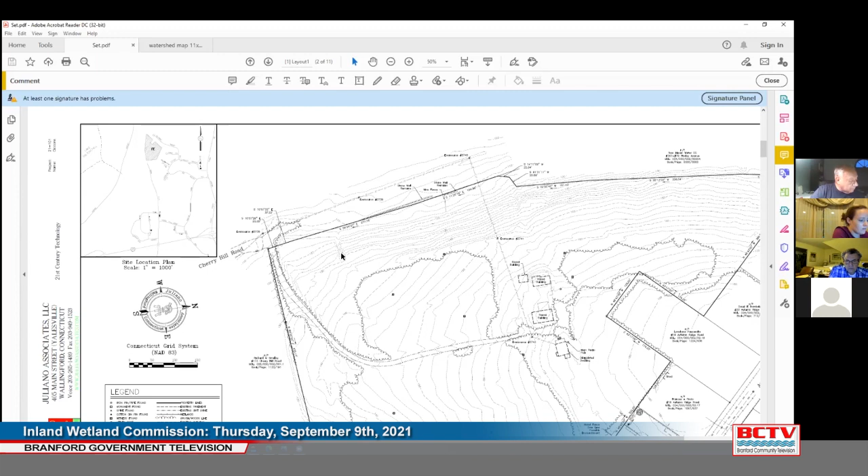Now, what we are proposing is... James, can I interrupt real quick? Jamie Frederick, the Wetland Agent. I just also wanted to identify, I took another look at the soils report today, and the soil scientist did indicate that there's an off-site wetland to the west of the property as well. Yes. So I just want to make the commissioners aware of that. If you want, we can pull up the wetlands report and show you the area he was indicating. Otherwise, I'll let the applicant continue with his presentation.

Commissioner Bassman, just a question as a follow-up to that. How far from the property is that wetland identified? Jamie Frederick, the Wetland Agent. The report didn't identify a distance, but they did point out an area on an aerial image and indicated that it is predominantly dominated by Phragmites. So it's somewhat visible where the area could be. Do you want me to pull it up? Do you have an estimate of the distance?

That area would be approximately, I don't know, probably about 80 feet off the property line in this direction, approximately right where my cursor is. Thank you. Yes, sir. Okay. So that covers essentially the existing conditions of the site.

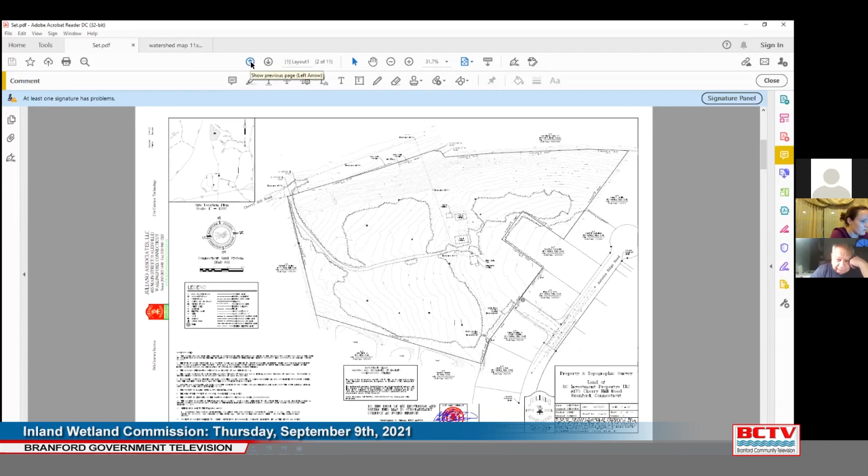Moving on to the actual proposal, what's being proposed is an 11-lot subdivision. And this is essentially the lot layout. As you can see here, this line is based upon the 3 man-made ponds to the east. This is the 100-foot upland review area. There will be proposed properties in that area. However, we are not currently proposing any activity in this area.

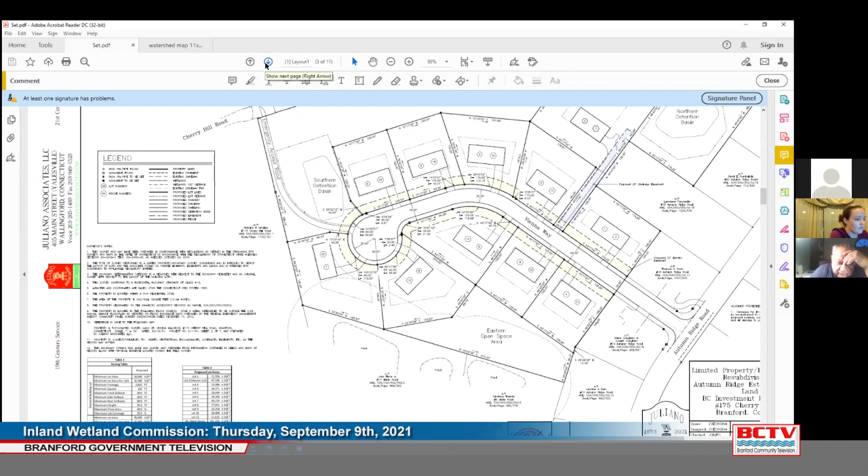I will note, we are showing a house very close to that. That is just for feasibility. At this point, it's oversized, but just showing that the lot can handle a house this big. I believe it's 40 by 80. So there will be no activities, including grading.

So these are the upper lots coming in off Autumn Ridge, because that's how we will access the property. This is the 100-foot upland review area again. In this area, the lots stop even before then, so there won't be any disturbance there. And as we go further down towards the end of the cul-de-sac, here again is the 100-foot upland review area, which does get very close to our proposed Lot 7 house.

But again, this house is not going to be necessarily developed at this size. And I believe the intention is when this lot is developed, we will be back in front of you for that specific lot. This is Commissioner Batson. Can you highlight that particular Lot 7 with the cursor? Yes. So it's right here. I could try to, oh, here we go.

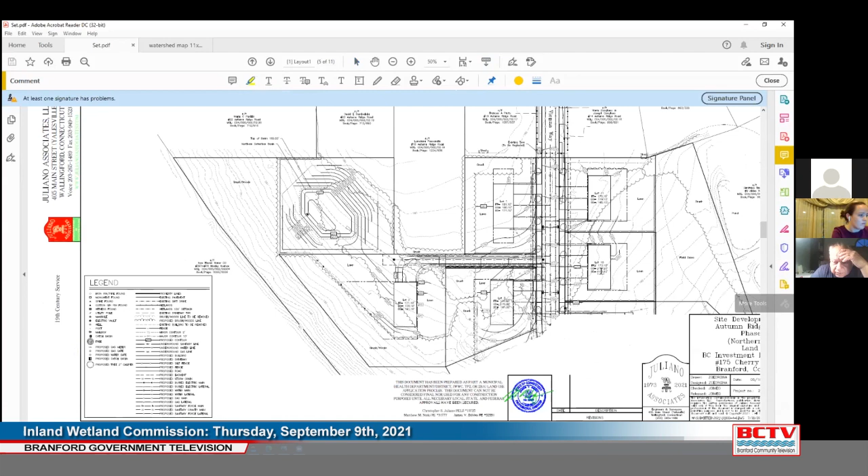Will this let me do it? No, that didn't let me do it. Yeah, it's in this right-hand corner. Here, I'll try to zoom in a little bit more for you. Oh. Mm-hmm. So lot 7 is right here. So this is the lot that I know is the closest.

Now, what we... Commissioner Kraus, can I ask a question about that lot 7? Absolutely. It looks like you have a depiction where the house could be in 2 different places, unless I'm reading the map wrong. But that's where it would be. And I heard you make a statement that said the house wouldn't be that large. How are you sure that the house isn't going to be that large? If this is what's on the map, I would think that this is what we have to consider.

This would be the maximum. So what I'm currently showing pictorially is the maximum footprint for any house on these lots. Okay. So anything that gets constructed is going to be smaller. So it's just feasibility. So just for curiosity's sake, what do you expect the average square footage of these houses to be? That hasn't been fully determined yet. Okay. At least it hasn't been relayed to me.

I know the intention is to essentially match what is existing on Autumn Ridge. Okay. They want to blend this subdivision in with that one. Make it look like one neighborhood. Correct. That's the intention. Okay. Thank you. Yep. And the house, there is only one on this lot, and I'm trying to move my cursor around it for you. This is the actual house. Mm-hmm. Yep. I see it.

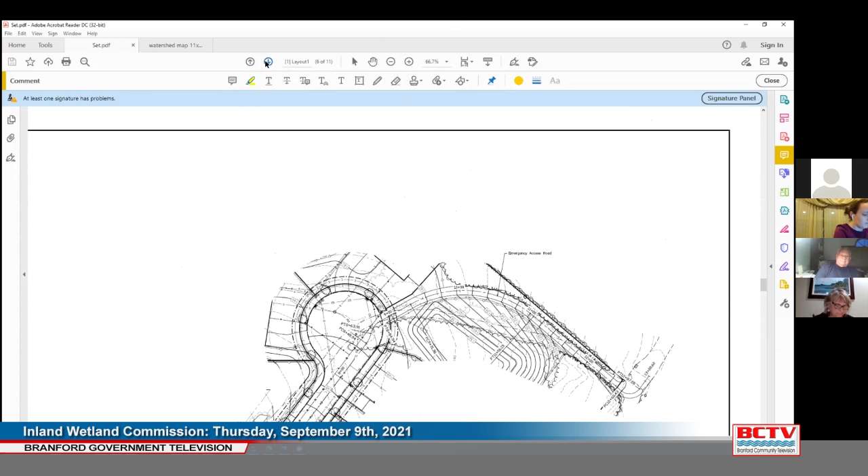Thanks. Yep. So in order to handle any increase of stormwater due to our development, we are proposing 2 detention basins. So I'm going to go to the northern one first. Okay. So as we come in off Autumn Ridge, there will be a detention basin in this corner. This is essentially the northern corner of the property. This detention basin, I do have a little cross section for you. Essentially, we'll have a 3-to-1 max slope for any of the sides of the detention basin, so it won't be any steeper than that. It will be a grass-lined detention basin.

How it is currently designed is there will be an outlet control structure with a 12-inch pipe coming out of it, and that will open up to a flared end and essentially handle up to the 100-year storm without going over a weir that we have built into the structure. So we also have a weir built into this detention basin that the water will not get to unless we, for some reason, got a 500-year storm or something above and beyond normal design standards. So that way the berm doesn't fail and cause damage. So it's designed to be able to handle additional flows without causing any issues or damage to the detention basin itself.

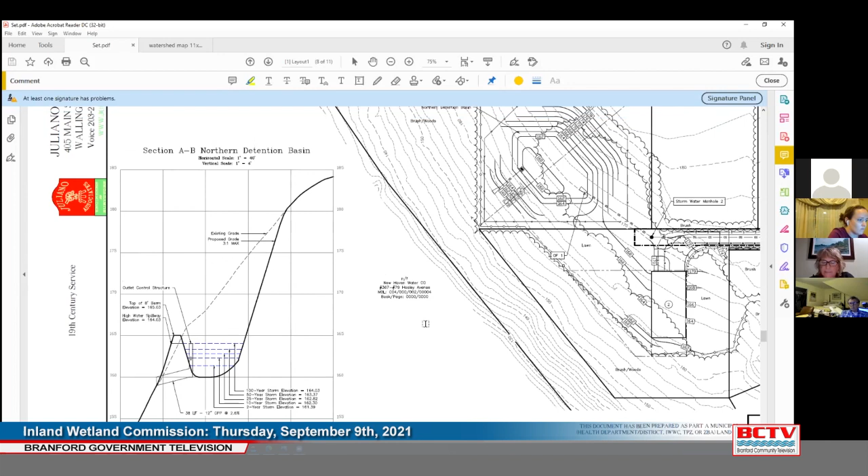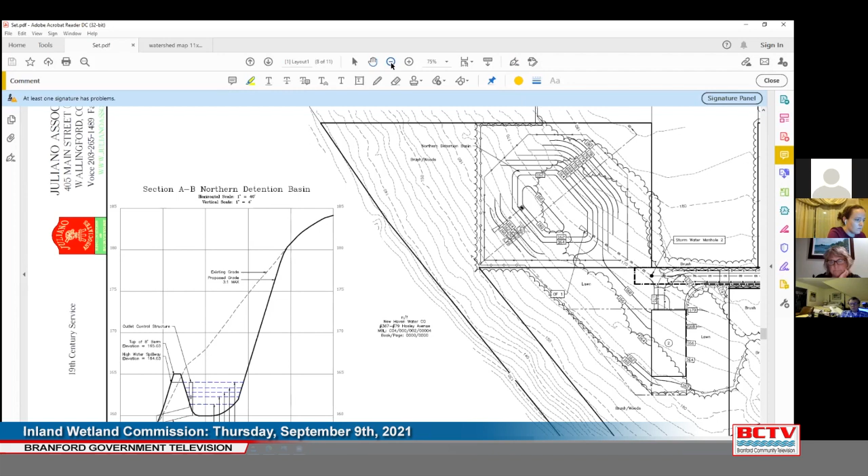And just one more question. I'm sorry. Who will make sure that pipe doesn't get clogged? We've seen a lot of pipes around town that are put in and then they break down and they get clogged. And we've had other developments where we've had some issues with that happening where it did spill over the top. So how is that going to be handled? So as of right now, we're still in talks with who's going to be responsible for the open space. So what this project has is a lot of open space on it. So I'll make it easier. And this particular drainage system is on that open space?

Correct. So we have the 11 lots, and then we have a western open space area, which will include these 2 detention basins, and we're going to have an eastern open space area. But right now we're talking about the detention basin on the western open space area, correct? Correct. And both of them are technically within that area. Okay. And the RWA does own the property. So there's either talks of the open space being deeded to the RWA or the town. That has not been finalized yet.

But that detention basin is handling what will become a town-owned road. So it will be the town's responsibility to maintain it, is pretty much, I guess, what you're saying? Depending on how everything continues to shake out. Okay. Yeah. Perfect. Commissioner Basserman, when do you expect those discussions with RWA to conclude? I expect a lot of that to be worked out through the planning and zoning process. By the end of the planning and zoning process, all that is going to be determined.

Yeah, I don't want to get the cart before the horse here, but it would seem to me that becomes an important element in our deliberations. In terms of, so my thinking is, or my understanding is that detention basin is going to be handling the stormwater from the town road, or what will eventually become the town road. So I believe that ultimately is whose responsibility it will become.

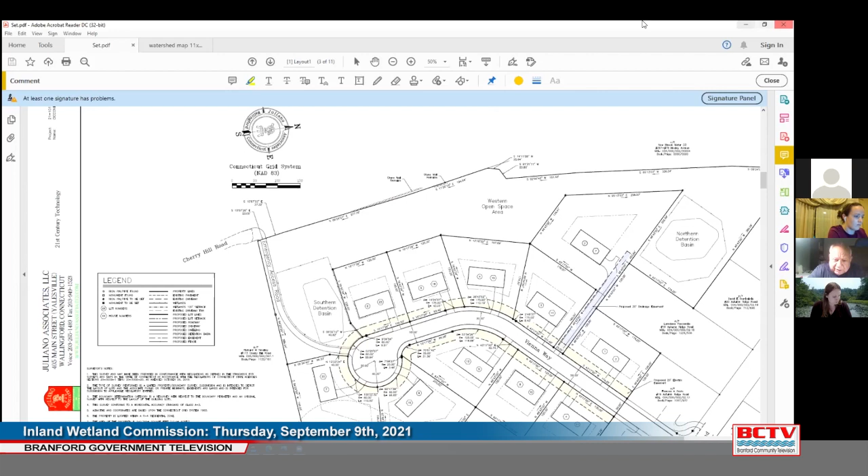Yeah, this is Commissioner Basserman. We've got a few open questions here. I don't want to stop the presentation, et cetera, but obviously there's concern amongst some of the commissioners regarding this overall water treatment on the roads and this detention basin. Anything you can do to accelerate those deliberations coming to a close would be appreciated. Yep, understood.

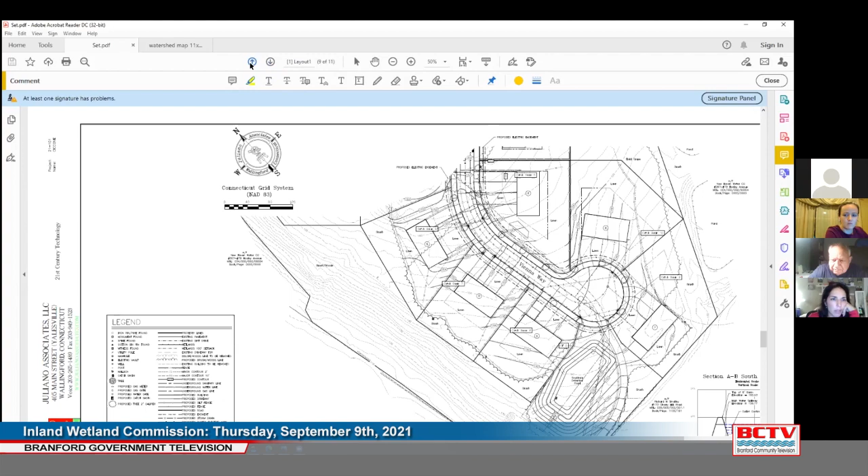This is Commissioner Boda. I actually, before you move on, wanted to understand a little bit more about the outlet structure that is on, I can't even see which map I'm on because I've zoomed in quite large, but where you have the outlet structure that would hold your 100-year, 50-year storm. Mhm. And it's a side view. It's the section AB Northern Detention Basin. So I'm looking at that and I'm wondering, so the outlet structure is at that top blue line. And you're saying that the water is not going to go into that structure until it hits an elevation of 164.03.

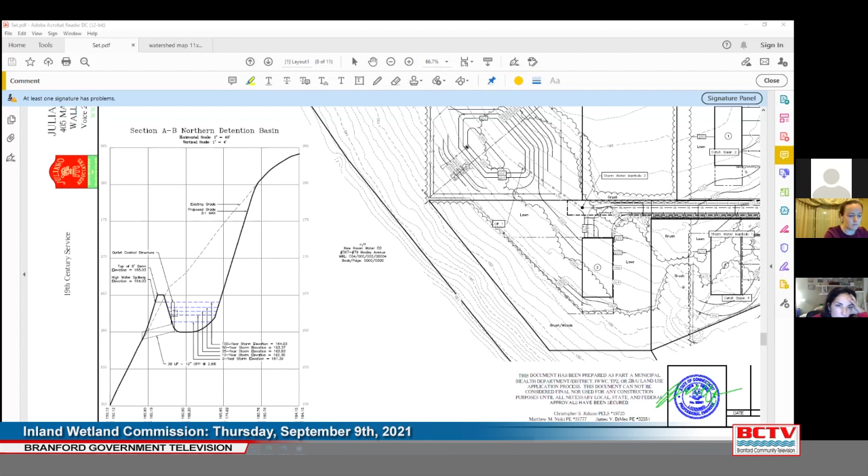So what in this structure here, so this is the northern one. Yeah, can you zoom way in so that everybody can see the details on that structure? Yep. So unfortunately, I apologize, I did not call this out. What there will be is a 6-inch diameter hole at elevation 162. So during the 2-year storm, all that water will remain inside this detention basin. At the 10-year storm, the water elevation gets just above 162, which is where there will be a 6-inch diameter opening on the side of this outlet control structure. So that's when water is going to start coming out.

And then that's going to be the restricting factor as more and more water builds up and we get more and more intense storms, up until we hit the 100-year storm, which is where the water essentially gets to the top of that outlet control structure. And then above, you've got how much room? So like the 200 or 500 year, it will overtop? So anything more than the 100 year overtops over the berm? It'll never overtop the berm.

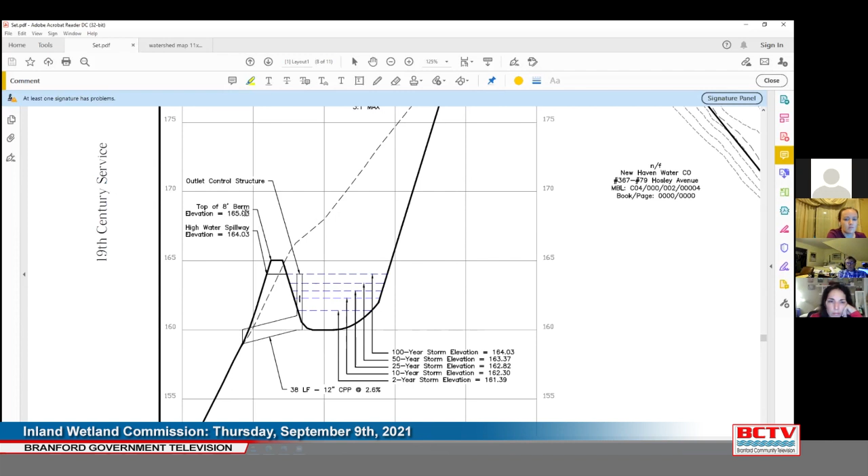So what we have is the top of the berm is at 165.03, and we have an emergency spillway at 164.03. So at the 100-year storm, it literally gets to that emergency spillway elevation. Is that kind of hashed line? Where is the spillway denoted? So it's right here on this profile. Can you do it again? I was looking at my own map. Sorry, I can't highlight it. So it's here. Okay, that's right.

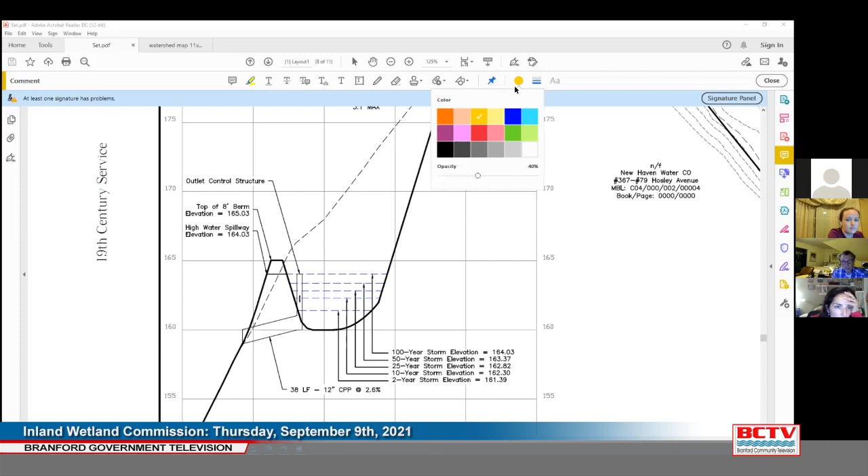I see it, high water spillway. Will that work? No, it didn't work. Okay. Yeah. There we go. Yeah, right there. So now I can't delete that. Sorry. That's okay. All right. Yeah. So it's right there.

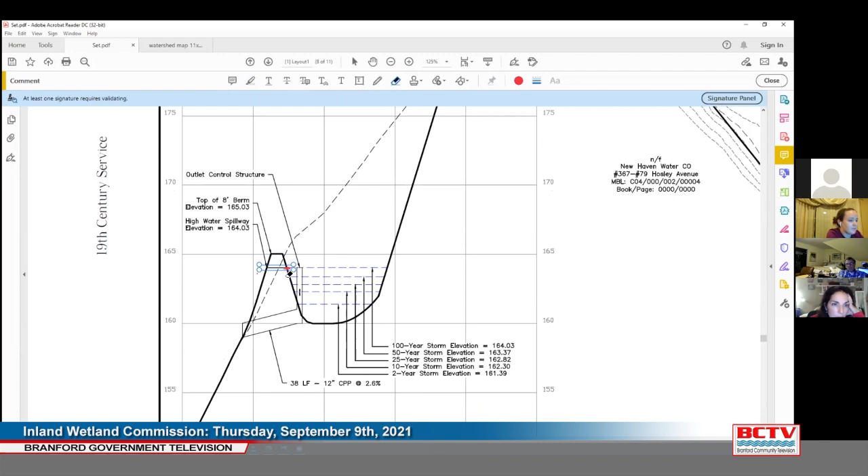Is the intention? It is where that spillway is depicted, at least on the profile. And that spillway will be a stone-lined spillway to help again prevent erosion if the water were to ever get to that point. So that's the northern detention basin.

Let me just ask another question before you move on. So then below the 10-year storm, that water will be detained and not infiltrate, or will the bottom of the basin allow for infiltration of the 1 and 2 year storm? It will infiltrate, yes. And we're being conservative with our infiltration rates. Essentially just saying it'll dry out.

So wait, there were 2 different things. So when you say that you've been conservative with the infiltration rates, does that mean that you're estimating, or have you actually done a perc test for the bottom of that basin? So no perc test has been done. I'm using soil data and also reports from the soil scientists and things like that.

And then basically I'm using an infiltration rate of, I believe it's 1 inch in 60, which again, as long as there's soil there, it'll go. And that's true for the other detention basin as well, that you're going off of? Yes. Correct. So soil maps and reports as well as the soil scientists.

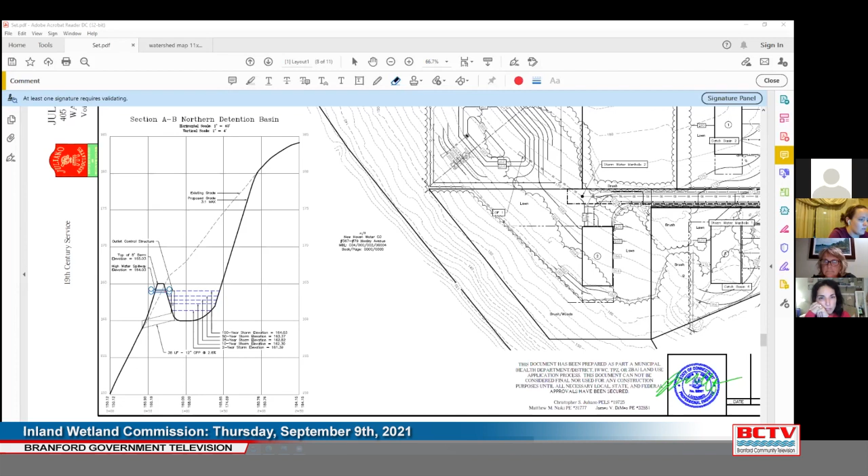This is Commissioner Begamon. So anything that goes out is going to drain onto stone, or only the spillway? So the spillway is there and designed for emergency purposes. Right. If we get like 3 hurricanes in a row and get unheard-of flooding, that's the only time that'll ever be utilized. So otherwise the water, if it goes up to the 10-year, what is it discharging onto?

At that point, there's a 6-inch diameter hole in the outlet control structure, which then leads to a 12-inch pipe. Right. And that 12-inch pipe has a flared end and will discharge out. It basically just daylights. Onto what is growing there, grass or rock or whatever. Correct. Just to give you an idea, the 100-year storm out of that pipe is only 1.26 CFS.

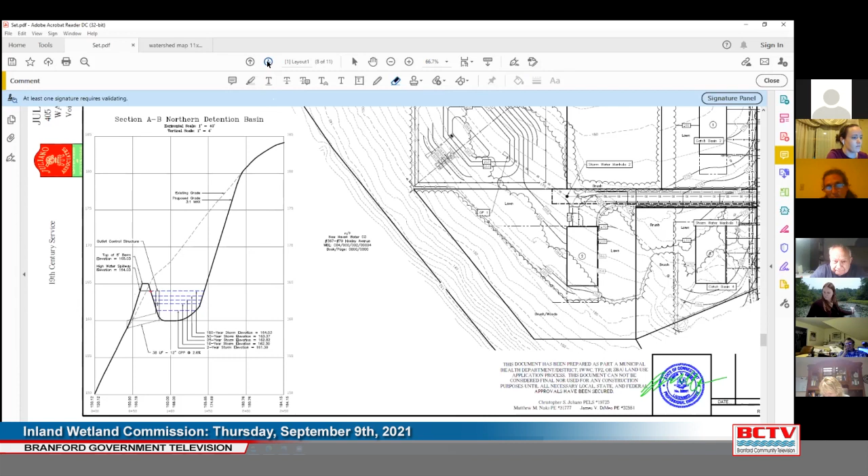Okay. Any more questions on the northern one before I move on? Okay. So the southern detention basin is at the end of the cul-de-sac. Essentially, this one's set up the exact same way. Again, a very conservative infiltration rate. We have the outlet control structure. Again, an emergency spillway, which will not get utilized unless something catastrophic happens. And we have a pipe with a flared end.

The opening in the side of this outlet control structure is actually at the base of the detention basin, which is again a 6-inch diameter opening, which then flows into a 12-inch pipe.

This is Commissioner Kraus. I have a question about the southern detention basin. I'm looking at your map and I'm seeing that you're moving the path that we walked up to the right, if I'm correct. Correct. We walked up the path that would go right at the corner of the southern detention basin. When we were walking, there was quite a bit of erosion on that path. It was really rutted with all the runoff.

So it appears to me that because of the steep grade of the property, once you put in the cul-de-sac and build the houses and all the driveways, and there's more impervious surfaces, this southern detention pond is probably going to get a lot more water than that area gets now. But even now, that pathway that we walked up was very rutted. So the water must have really come streaming down there in the previous storms.

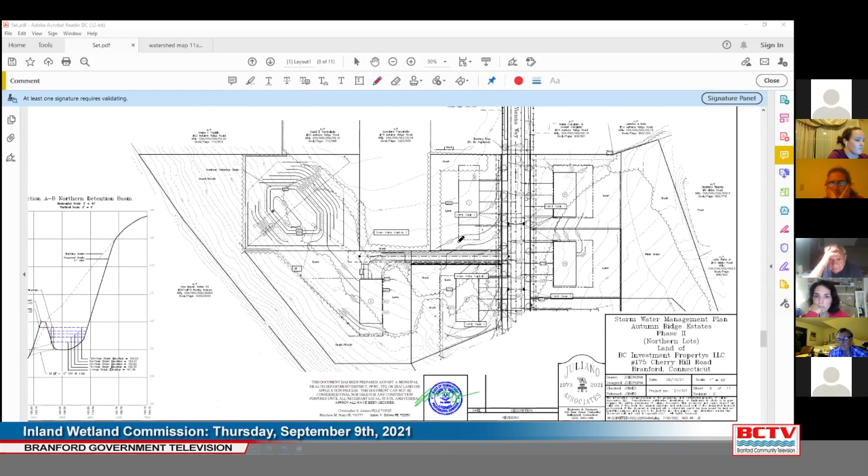I'm sorry, this is Commissioner Boda. I just want to clarify. Before I had asked about infiltration, are you asserting as part of this application that you are retaining the 1st inch and infiltrating it? So the northern basin is. That is not the case on the southern basin. So that's a long-winded answer of saying no. That was not considered for the basins.

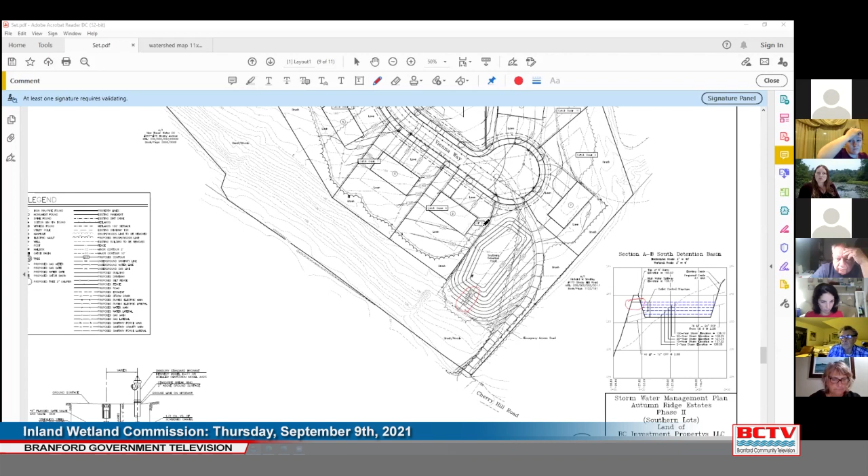Jamie Frederick, the wetland agent, and just to point out, the individual house structures' roof drains do not discharge to the stormwater basins and are not retained on site either. Correct. The roof drains are all basically just discharging to the ground and not going into these detention basins. Part of the reason for that is otherwise I was afraid of starving any existing wetlands that we did have.

Commissioner Batsman, again, given the fact that the regulations that we have in town talk about retaining the 1st inch, why was the decision not to incorporate that into the design in this detention basin in the south? I will be 100% honest with you, sir. I do not have a good answer for that other than I will look into it and make it happen. Yeah, specifically, to infiltrate. Correct. I'm sorry, this is Commissioner Boda. Did you say infiltrate or retain? Sorry, I was trying to read. I believe you said both actually, but yes.

And that's not a difficult fix for us because the only basin that I have to reevaluate is the southern one. That's not going to be a problem. Yeah, this is Commissioner Boda, and I think that if you are going to assert that, then you would demonstrate that with some data. Absolutely. Yep. The drainage report will be updated to reflect it as well. Yes. Thank you.

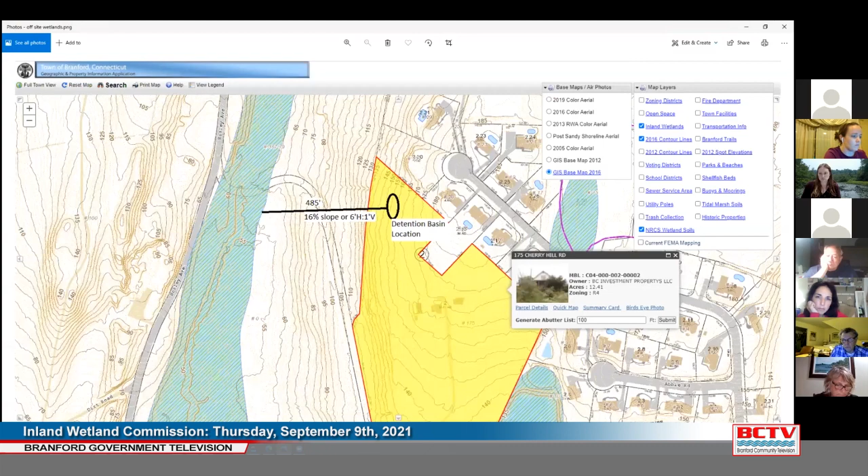The high point of the property is essentially, as you come in off Autumn Ridge, right around here where the first lots are. And then the road hooks down and goes down slope. Secondly, I did also evaluate the watersheds, and a watershed map has been provided to you. Each watershed and everywhere that the water is going, I analyzed. It's essentially broken down into 4 different areas, and not one of them has an increase.

I'm either matching or decreasing the flows to each of these 4 areas around the property that I evaluated, which essentially I evaluated in this corner of the property. I did evaluate over here as well. And then I had the pond area, and I believe this property as well. So those are the four areas that I looked at, because those were where the water was heading to. And I didn't want to completely change where the water's going.

So the drainage report, if you took a close look at it, would indicate that there's no increase in any of these areas, and no significant changes. In volume or in timing? In peak flows is essentially the main thing that I looked at. The only places that will have additional volume would be the waters flowing north.

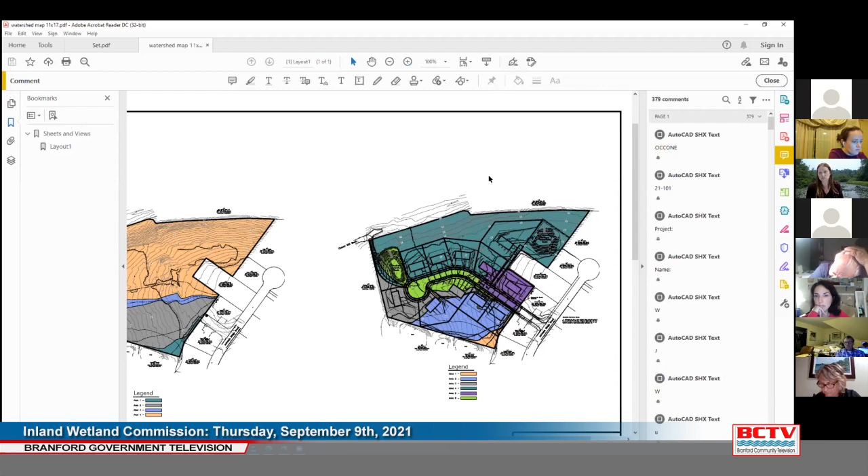Well, this is Commissioner Basswood. It sounds like that report is going to be something we're going to take a close look at. And it's interesting as to how you make the evaluation with treatment of rooftop stormwater versus without. So hopefully we can move on, but that shows that report is going to be critical. Okay, and then I think that was the bulk of what I wanted to talk about, at least in terms of wetland impact. So if there's any other questions or concerns, I will do my absolute best to address them and or make sure I have answers for you for the next meeting.

Commissioner Bergman, just one question about that southern detention. Yes, ma'am. The outlet for the pipe at the bottom, that's going to go towards that already kind of erosion ditch that we looked at on the site walk yesterday? Yes, thank you for bringing that up. I forgot to mention that. So these plans haven't been revised to depict this. I did issue a letter to Jamie.

So basically what we'd end up doing for that erosion ditch is some minor regrading in order to put it to a 2-to-1 slope, and then stabilizing it with standard seed and hay in order to prevent future erosion.

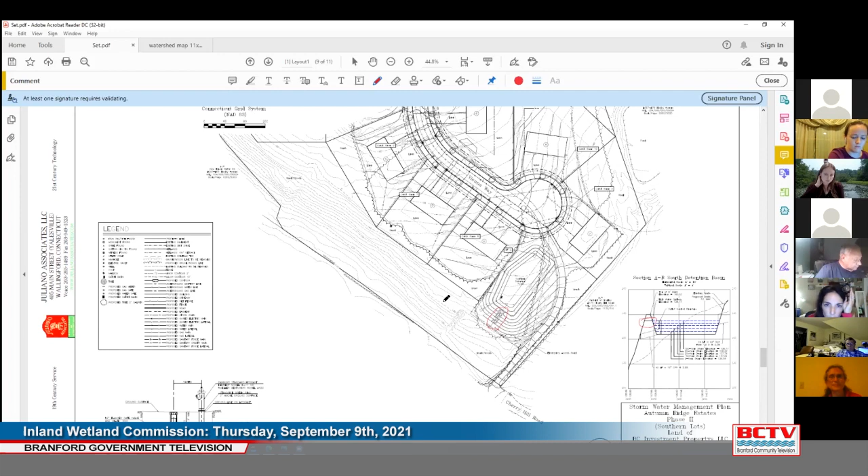This is Commissioner Boda. I was trying to look at the file in the Dropbox. Can you clarify which map has the sediment and erosion control plan? So the sediment and erosion controls are pretty much shown on the stormwater management plan, so sheets 9 and 8. The main thing is going to be the stone silt fence. That essentially is encompassing most of the S&E measures that are going to be required for this.

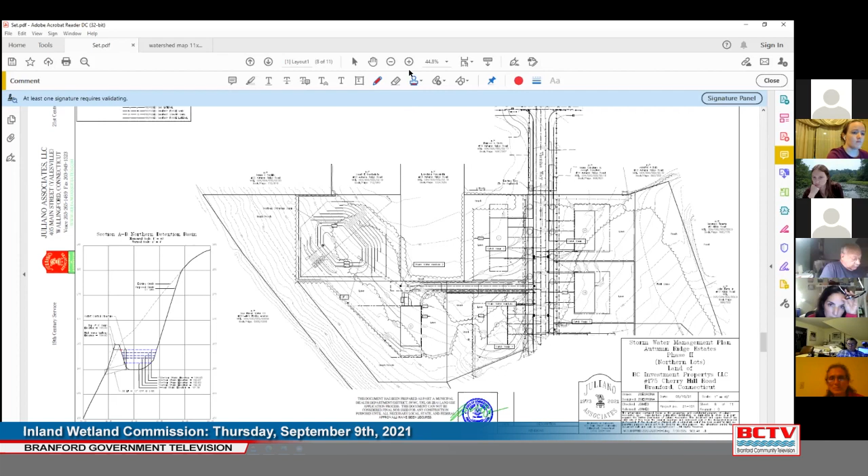This is Commissioner Boda. Do you have stockpiles on the site? And if you would just refer to the map number that you're looking at, because mine is blown up like this, but I can see it. Yep. It does not appear to be on there. It will be. I apologize.

So this is Commissioner Boda. As you're doing your review, go through with a fine tooth comb and make sure that any of the sediment and erosion controls are noted, so that we can look more carefully at them. I'll leave that to you to go back and see if there's anything else that's not called out.

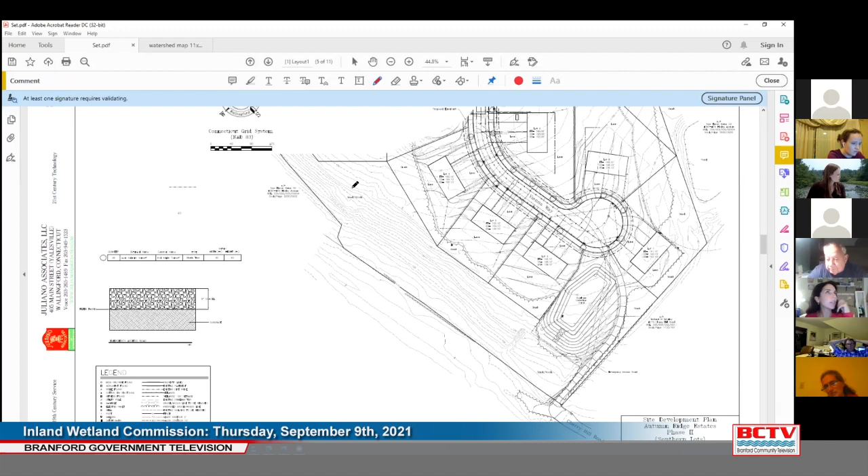And if the intention is for the town to maintain, is there an intention for snow stockpiling? Where would that get pushed to? The end of the cul-de-sac? Yeah. There's really no other location for snow other than the end of the cul-de-sac. That's essentially where it would end up going. So this is Commissioner Kraus, and you probably wouldn't block that emergency road you have. So where would you be putting the snow? By lot 7? That's the closest to the wetlands?

So where we'd be putting the snow? Right. The snow would most likely end up in this area. Sorry, it's crude. But then you'd be blocking that emergency road that you're putting in. It won't block that road. It'll need to be over. Sorry, my hand's a little shaky. So all the snow is going to fit in that little section of a cul-de-sac? I'm going to have to evaluate the snow further. That sounds like the right answer.

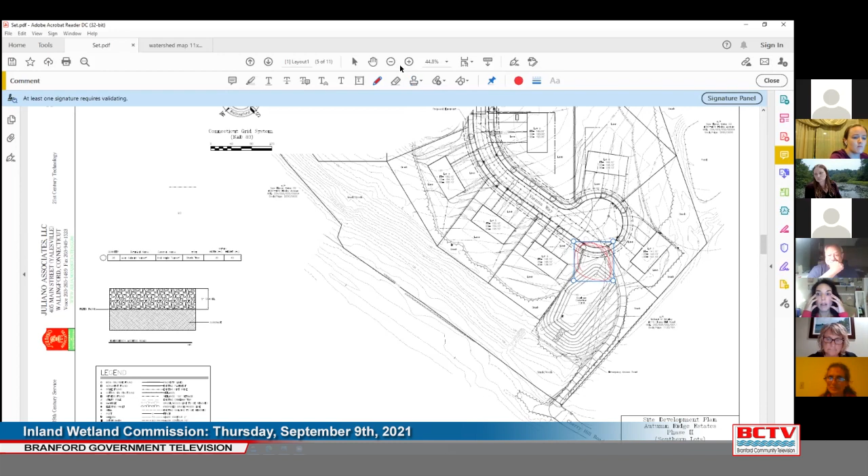That's Commissioner Boda. I would think about, as you're evaluating, both the access road, and if the only place the snow is going to end up is piled on top of a storm drain, that is going to potentially impede the water moving off as it starts to melt. Mm-hmm.

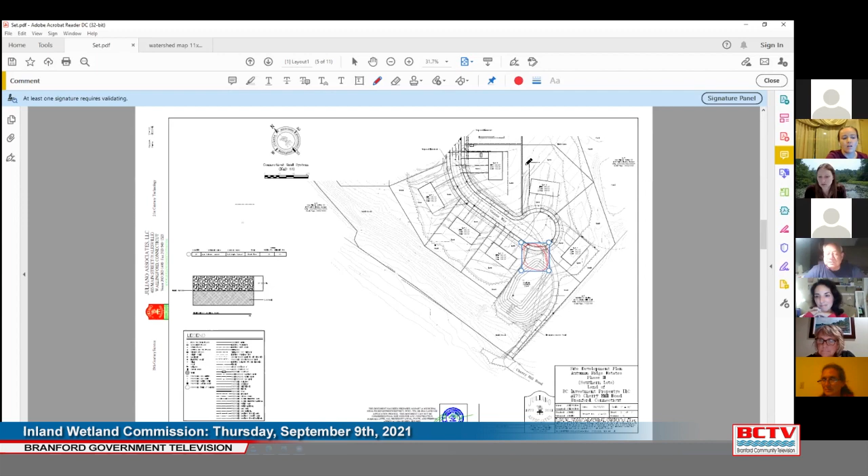Any other questions from the commission at this point? I'm good. You're good? No, I said I don't have any questions. Oh, okay. Thank you, Commissioner Kraus. If there's a member of the public that would like to ask a question of the applicant, please state your name and your question. One minute, Peter. I'm going to stop screen sharing so I can check the participant window and see if anybody's raised their hand. I don't see anyone trying to talk. You might want to let people know how to unmute if they are on their phone. Yeah, if anyone from the public is looking to talk, it is *6 to unmute, or *9 to raise your hand.

Do you have something that popped up? Somebody's asking a question in the chat: has the Autumn Ridge access been approved? Nothing has been approved at this time. Great. Then, Mr. Chairman, I would like to table this application till next month until I can address the comments of the commission. I appreciate your motion to table it. I think the commission would be happy to entertain this at the next meeting.

I do just have one question. Jamie, I would like to confirm, has this been given to the town engineering department, Jamie Frederick, and the wetland agent? It has been. I have not received comment, but they do have a copy for review. And I will let them know that it's continued to the October 14th meeting, so that hopefully they can provide comment in time that you might be able to respond to it.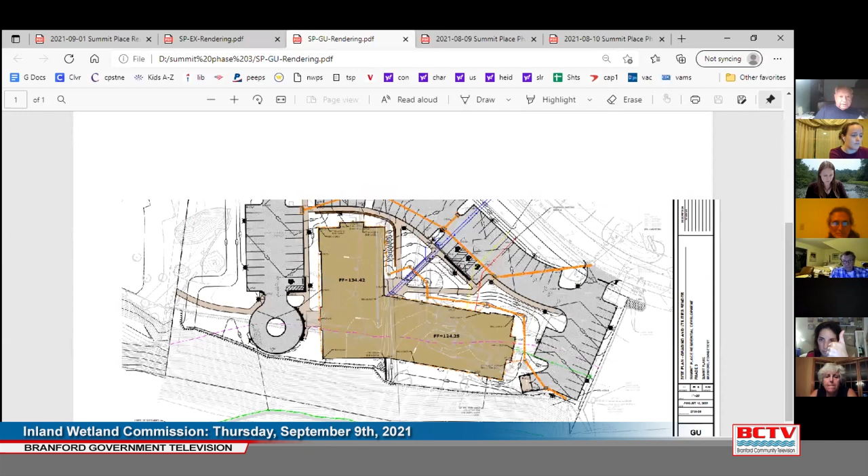Okay, great. So she had a question about whether or not access would be needed to the east side of the building, east being on the downside of this map. And access will not be needed. That area is just going to be landscaped and lawn. Also, at Jamie's suggestion, we included a split rail fence at the limit of disturbance or the top of the slope that's going to remain to help discourage any activities going down the slope. I think the nature of the slope, for those members that saw the field walk, is somewhat discouraging enough, given the grade of it.

And lastly, we were able to locate the ultimate stormwater discharge that comes from a portion of the property currently and discharges into the adjacent wetlands. We generally found it to be in acceptable condition. The pipe's in good shape. Limited erosion at the toe of the outlet.

And again, what was mentioned at the last meeting that we continue to propose is reduction in impervious surfaces from approximately 2.1 acres out of the 3 overall to approximately 1.5 acres. So we are reducing flows both to the wetlands and to Summit Place.

One item that was mentioned in Jamie's report or her comments was Section 7.6A of the regulations, which has requirements regarding storage of the first inch of the water quality volume of runoff. And we are seeking, I don't know if waiver is the right term, but I know that your regulations do allow for the commission to consider other alternatives. We're hoping not to do that for a couple of reasons. The first is that

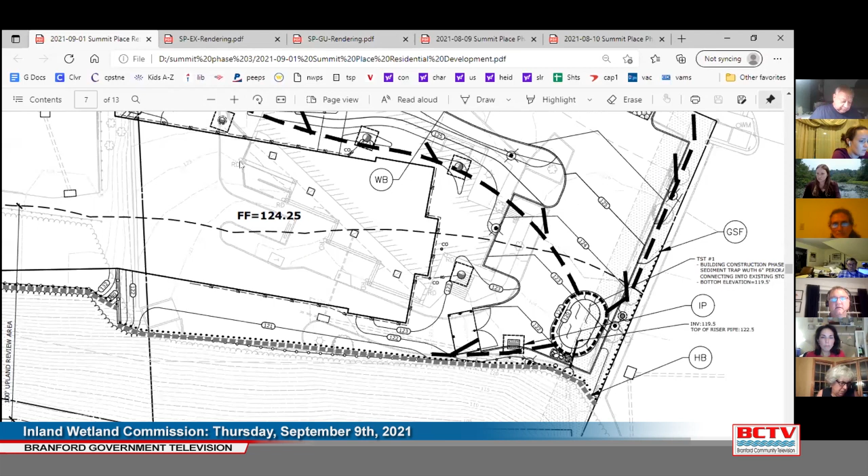Is it depicted on your plan anywhere? Yes, sir. It's on the grading utility sheet. We don't show it on this rendering for clarity, but let me go over to our full set of plans that was submitted. And let me scroll up to the utility plan. So, for example, on the drainage system that connects to Summit Place, this last inlet is a CDS model 2015-4. And similarly, the last inlet structure.

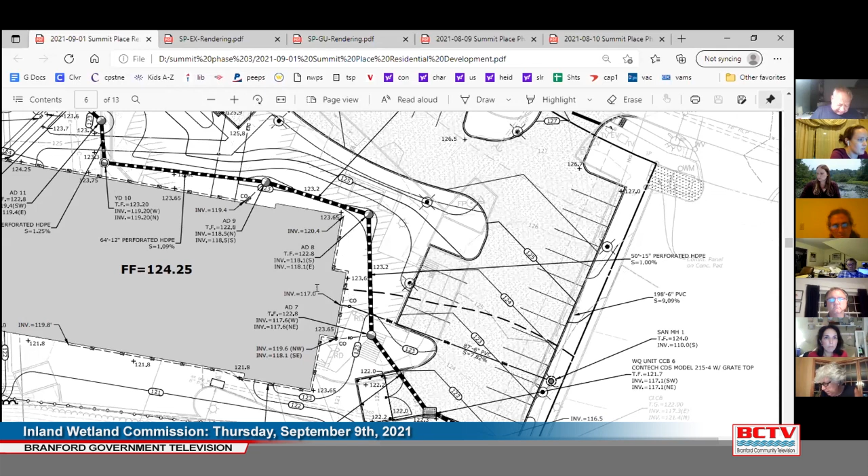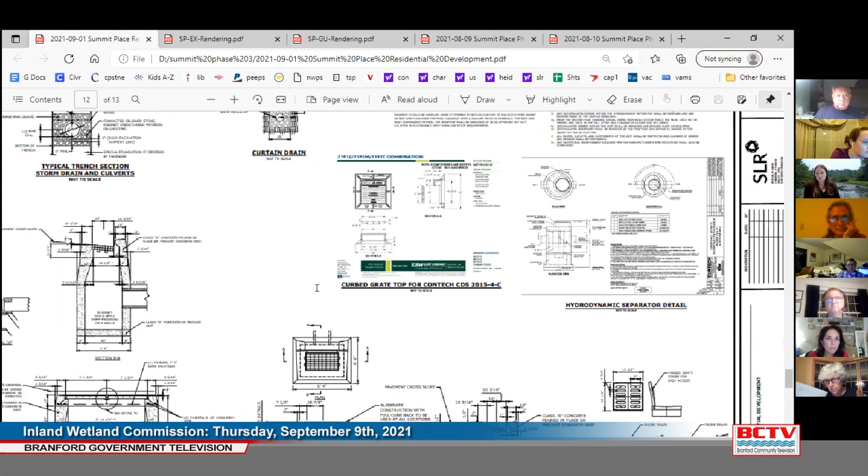Is there a cross section on sheets like 10 or 9 or one of those? I believe we have a detail showing that, and also we have literature in the drainage report from the manufacturer showing how they meet the water quality flow requirements, and also some case studies where they've demonstrated in situ. Okay, I'll keep looking. Thank you. So I'm looking through our details right now. We do have details and cross sections for the hydrodynamic separators. Thank you.

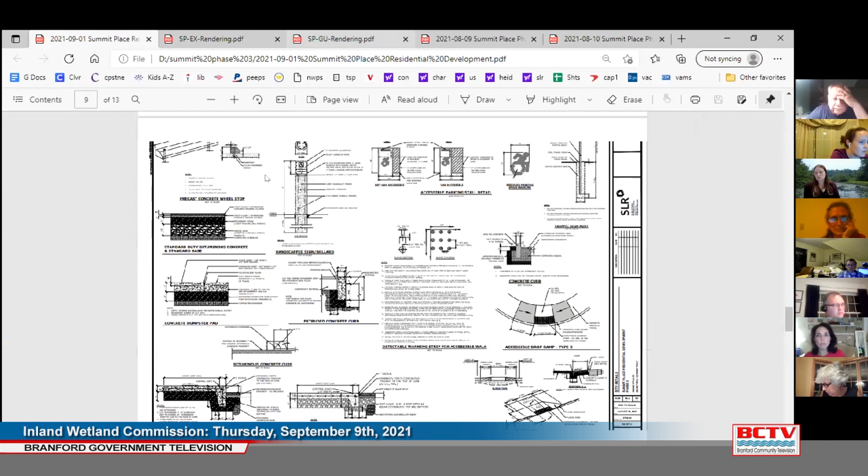So that's a summary of the modifications to the plans that we've made. If there's any questions from the commission, I'd be happy to answer them. I know that most of the members were at the field walk yesterday. So if there's any questions that came out from that field walk, I'd be happy to answer them as well.

Jamie Frederick, the wetland agent. Can you go over the phasing of the erosion controls during development real quick? Sure. So we go back to our sediment erosion control plan. So we provide for 3 temporary sediment traps, one that will connect to each of the current discharge points exiting the site.

The first of which is located in the upper parking area, which during initial construction of the building will have runoff directed from that upper parking area to it, where it will have an under drain that will be wrapped in filter fabric and stone, and an overflow riser that will allow any accumulated runoff in the basin that doesn't get through the perforated under drain to reach the catch basin in Summit Place.

Similarly, a smaller temporary sediment trap located a little bit further to the north with a similar mechanism for dewatering, a perforated under drain wrapped in stone and filter fabric with a high level riser that will be directed to a catch basin on Summit Place. And lastly, another additional temporary sediment trap to the southeast corner of the site, which will ultimately discharge through a filter fabric encased under drain to the manhole that we saw on our field walk just off the

current edge of pavement. So in terms of phasing, this sediment trap will exist during the initial phases of construction and during initial building construction. It will be eliminated essentially when mass earthwork and mass site grading occur to create the parking lot as you see here. And then these two temporary sediment traps will handle the runoff from this upper parking lot.

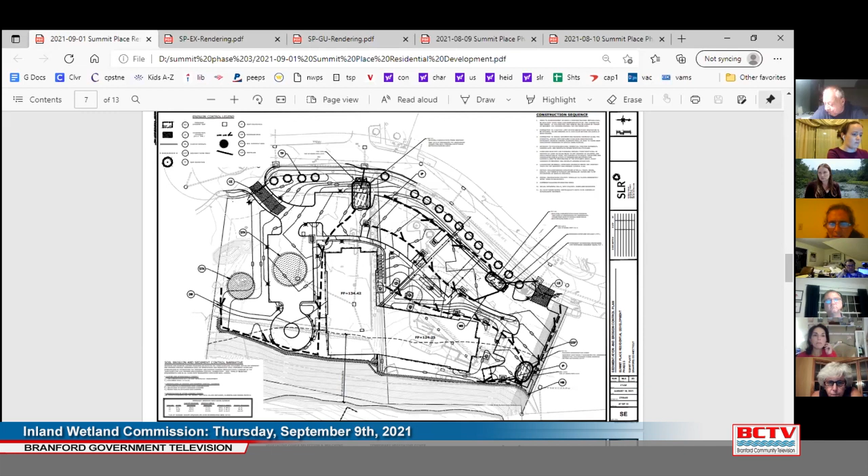Understood. Commissioner Begman, the question, you may have said this, but the roof runoff, how is that being handled? So the roof runoff, let me go back to my colored plan. The roof runoff is all going to be conveyed to the storm drainage that ultimately discharges to that existing manhole off the parking lot today. And that represents the majority of the runoff that will get to the wetland, with the exception of this portion of the parking lot over here.

So while we're reducing the amount of impervious surface and the amount of runoff that gets to the wetland, we're also changing to a large degree the quality and nature of the drainage that gets there, because the majority of it is just going to be building runoff, which will have a relatively clean composition when compared to parking lot runoff. So the building is all being directed ultimately to the wetland through a water quality unit. Thank you.

Any other questions from the commission? I think staff's recommendation is that we get the additional information from the applicant and assess this at our next regularly scheduled meeting. Is there any commissioner that feels that they have enough information to want to act this evening?

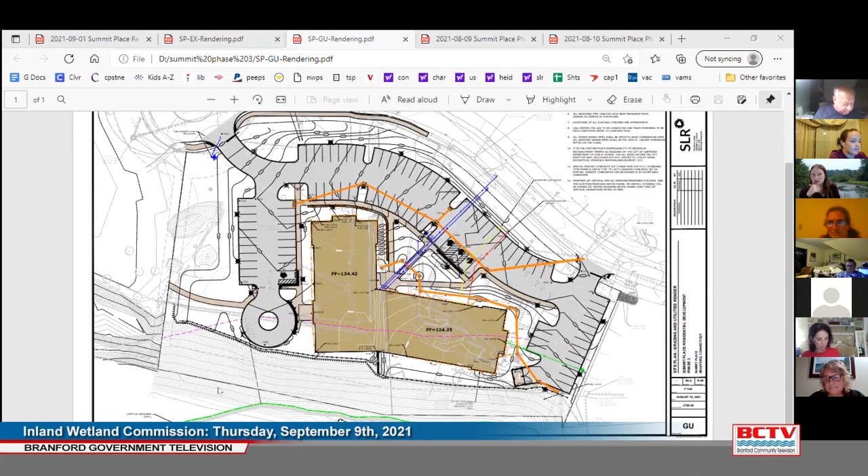All right, next up, Inland Wetland 210804, 47 Gould Lane, scour hole repair. Jamie? Jamie Frederick, Inland Wetland Agent. I think I was supposed to get a revised plan with maintenance details. And it looks like the applicant is not present. Jamie, Michael, did you? Oh, sorry, Michael. I didn't see you. I'm sorry. I'm on my wife's computer. All right. So I guess the applicant is present.

So I had mentioned that the commission might want to see maintenance details for the proposed drainage structure. I've not received that yet, but I can pull up the site plan that we do have. Also, I just wanted to mention that if you look forward to enforcement on the agenda, 47 Gould Lane is under that section as a notification of the erosion control status, and the applicant had requested that both items be discussed at the same time. So I am going to take a minute. Does any commissioner have an objection to dealing with those at the same time? Okay, good. Treat them the same.

Jamie, not to interrupt Michael again. I did forward those comments along earlier in the day, and I just resent it again. If you have the ability to pull it up out of your email, the revised plan with the maintenance comments that you requested are there again. Jamie Frederick, Wetland Agent. I will share the site plan that was just emailed to me. Obviously, I've not had a chance to take a look at it. Screen share. All right.

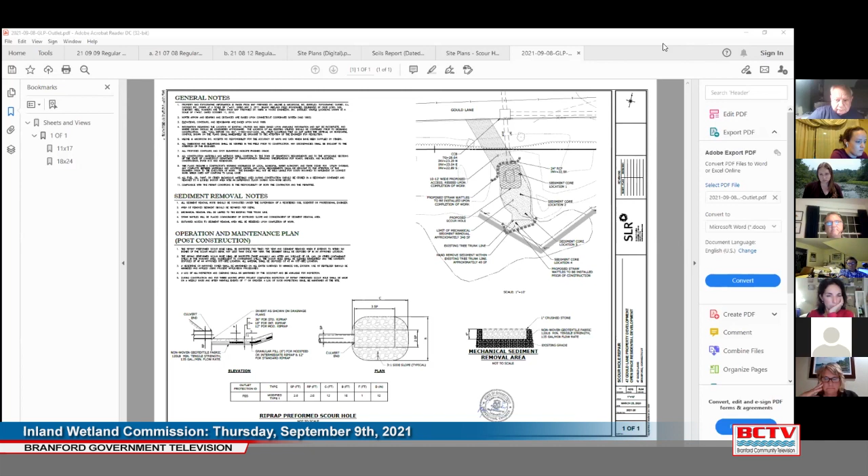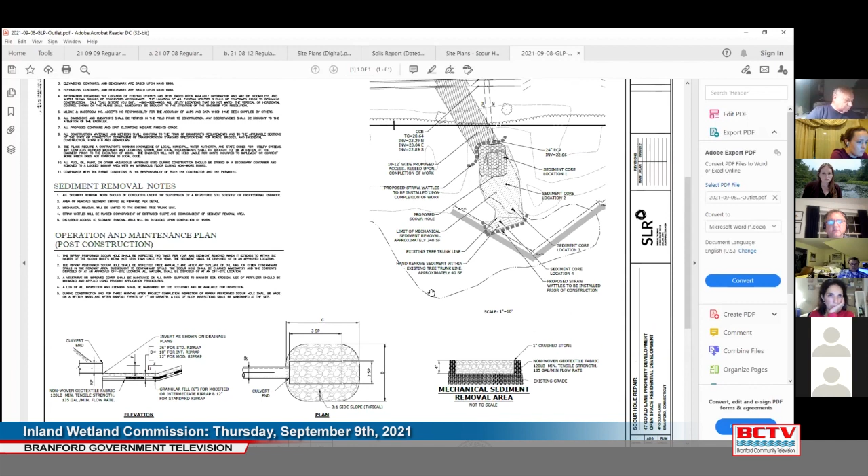So we have a stable surface within the existing channel where the stormwater exits the road. We did review this with the land trust, and they have provided their consent for the improvements. And Mr. DeJoy is also committed to having a soil scientist oversee the removal of the sediment, so it's done in a sensitive manner. And whether it be a soil scientist hired by himself or one hired by the land trust, I don't know that that's been worked out. But either way, it will be overseen by a soil scientist, and the end result should be an improved condition at that outfall where there is no stable energy dissipator today.

In terms of the post-construction operation and maintenance plan, it's really very simple. This is no different, like I said, than sort of a riprap splash pad, more or less. So it does have a small depression in it, so it should be monitored occasionally for accumulated sediment, primarily road sands, things of that nature, and sediment removed when it's greater than 6 inches deep. There will need to be monitoring of it after it's installed to make sure that there's no issues with erosion, further erosion into the wetland areas. So it's really a very straightforward maintenance plan. There's really not a whole lot of complication to it. So if there's any questions, I'd be happy to answer them at this time.

Commissioner Bassman, just for clarity purposes, what we're looking at on our screen right now is the same plan that we received in August, except for the addition of the operation and maintenance plan. Is that correct? That is correct. Okay. Thank you. Any questions from the commission on this proposed repair? This is Commissioner Bassman. Staff, are you okay with moving forward on this? Jamie Frederick, the wetland agent. I would have a couple of questions.

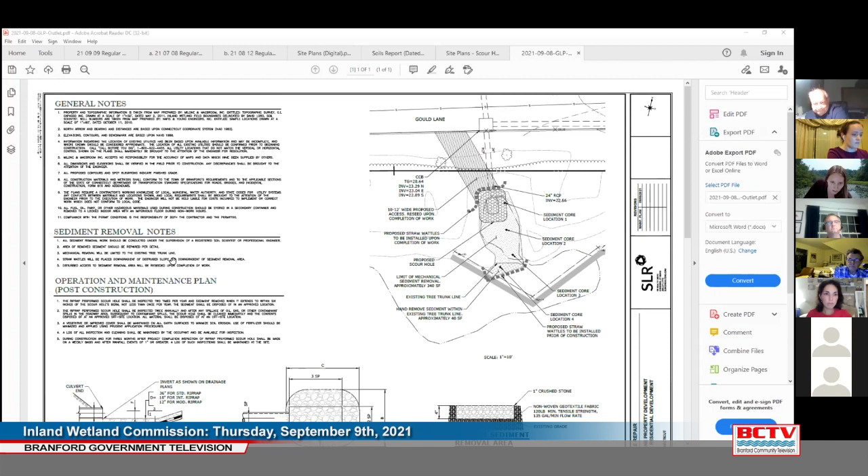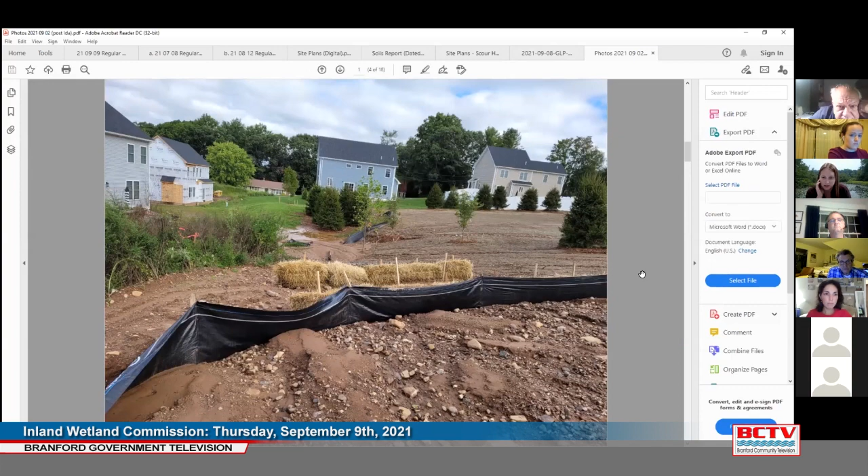The other concern I would have is that there have been some erosion control concerns, particularly with the large rainstorm events that we've had recently. And I will share some pictures of what the site looked like immediately after Ida. Bear with me as I go to the other discussions folder. So this is just a picture of the lower detention basin, upper detention basin, silt fence overtopped, and at the bottom of the picture, you can kind of see there's a yard drain circled with silt fence that was also overtopped. So there was sediment that got into the yard drain, which ultimately discharges to the outlet we were just looking at the maintenance for.

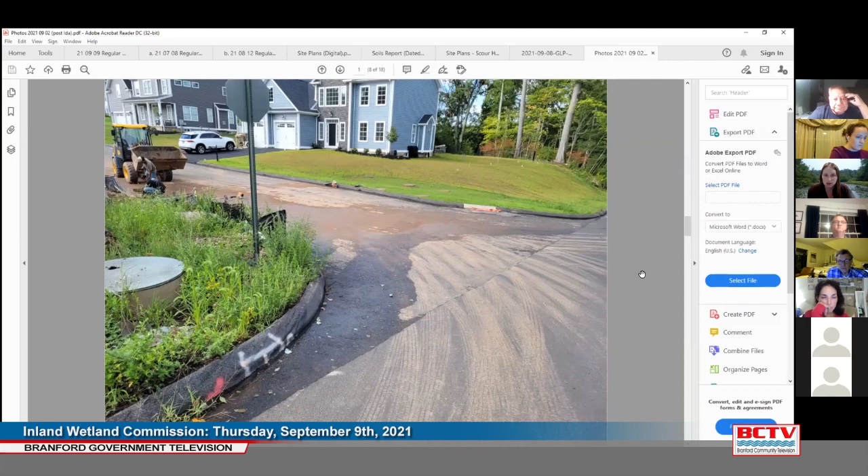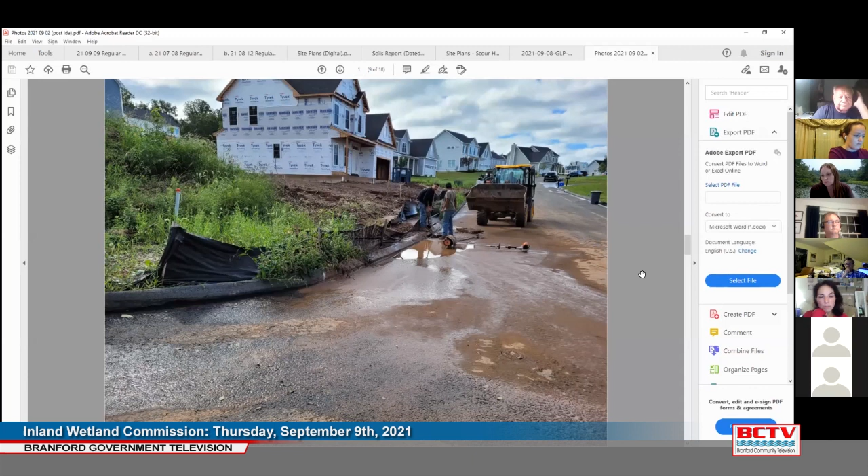And then just kind of general, this is uphill of the erosion controls, but just some general site conditions. And then as you can see, there's a crew working on cleaning out the catch basin here. This was in the morning right after the storm, so they were on the repairs, but the silt fence also overtopped on the corner of Gould Lane and La Mantra, and sediment got into that catch basin as well, which also discharges to the outlet that they're looking to do the activity at. So I just wanted to make the commission aware that there have been some erosion control issues relative to Ida and Henri, and that these issues are relevant to the area that the application is pending for.

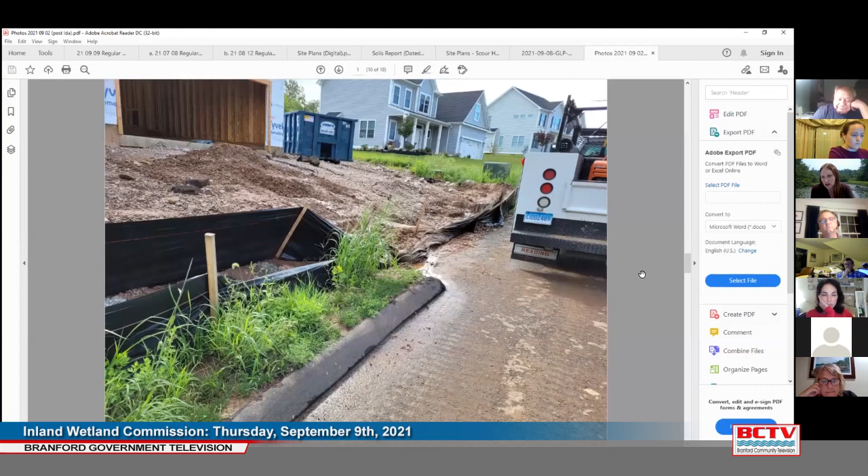And there have been substantial improvements on the site. However, these areas are still open and under construction. So this is the low point in Gould Lane. The catch basin on the left-hand side of this picture, to the left of that is where the outlet is. And that's the general area that the work will be proposed to occur in.

And this is up by the discharge for the lower detention basin, which is very well vegetated, as you can see. So then, this is Commissioner Wasserman. So Jamie, how would you like to proceed here?

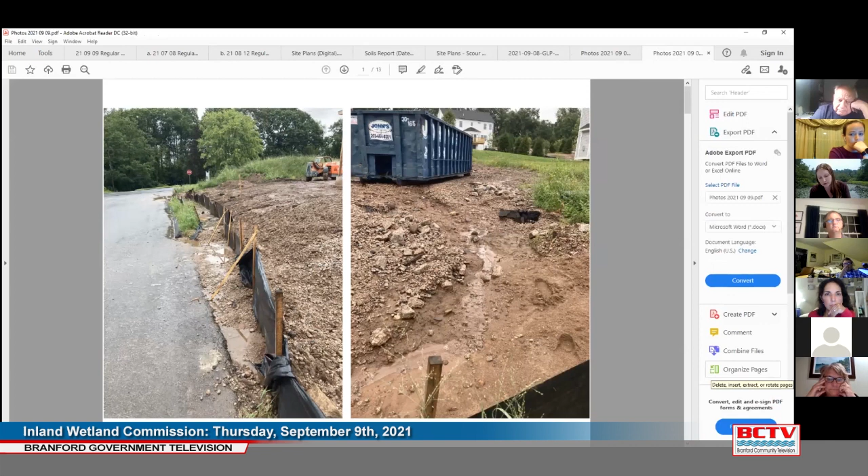So as you can see, Abby went out today to inspect the erosion controls again, and the applicant has taken measures to try and prevent any further erosion from occurring. It's very challenging right now with the way that the site is open. I guess my recommendation would be that the commission is sensitive to the conditions under when this activity should occur, and possibly, I know the applicant is looking to seed a lot of the areas that are problematic in the near future. So maybe getting those areas seeded prior to the activity.

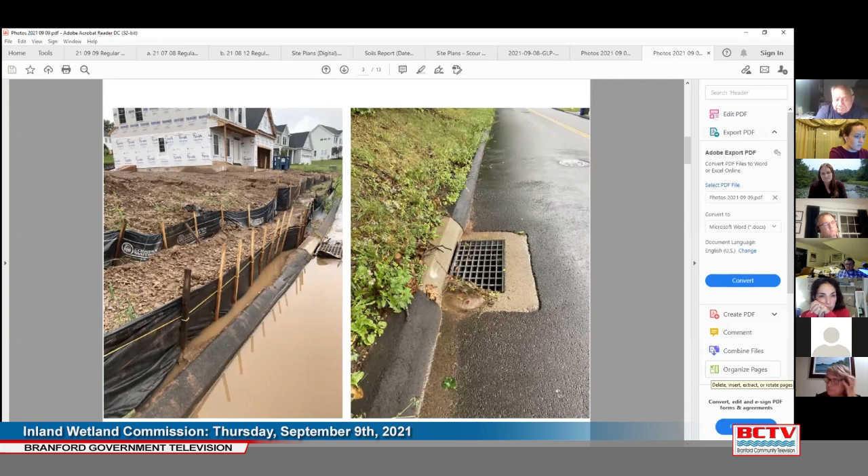I mean, I'm sure the applicant doesn't want to have to go in and do this activity twice either. So I think just using common sense in how this is handled moving forward. And I would offer also that I'll ask Michael to speak to when he plans on reseeding those, particularly lot 20, which is one of two lots that are currently causing issues, just because those are the two lots that are under construction that are not really fully vegetated at this point.

Lot 20 in particular is the larger of the two, and it was hydroseeded, and this tropical storm Ida came at the wrong time and really just kind of overwhelmed some of the E&S controls down below. But Michael, if you could share what your time frame is for grading and seeding lots 20 and 17. When those are vegetated, which hopefully is soon, then we'll be in a position, along with hopefully a drying out period along Gould Lane, to remove that sediment down there.

Michael DeJoy, Donmar Development. So lot number 20, as long as the conditions are dry enough tomorrow, we are going to fine grade and rehydroseed for the third time now, lot number 20. And probably middle to the end of next week, we are going to bury the propane tank on number 17, grade it, and also hydroseed that as well.

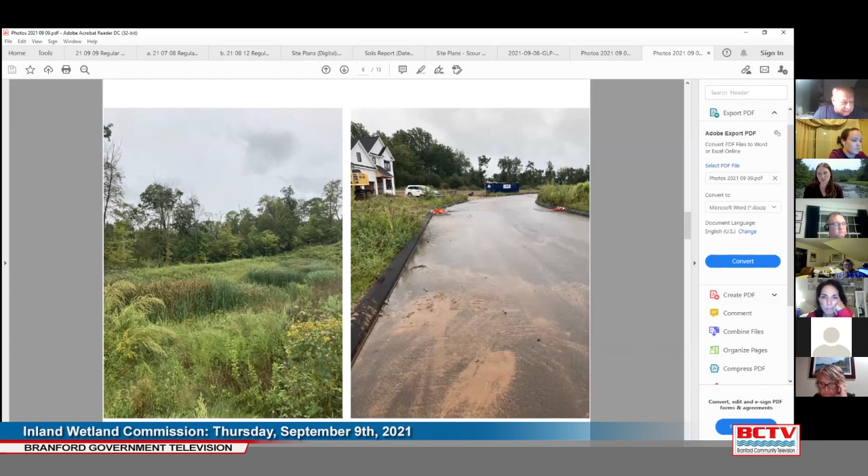Commissioner Wasserman, it sounds to me like I haven't heard anything about the scour repair that anybody has issue with. Timing seems to be the appropriate gating factor on this particular fix. But I also understand that in terms of approvals, Land Trust and Inland Wetland staff would be involved in agreeing on the timing. Do I understand that correctly?

So Michael DeGioia, Donmar Development. Chairman Wasserman, yes, that's correct. So along with the town enforcement officer, the Land Trust also has their own wetland scientist or soil scientist engaged. They have to confer together, the 3 of them, along with my wetland scientist from SLR on timing. Otherwise, it's not a go. So we seek application approval so that when the time is right, we are able to go ahead and proceed.

I guess this is Commissioner Wasserman. Jamie, if the agreement is that staff approve the timing, is there any other mechanism that you need to feel comfortable with to move this forward? Or do you need time? I'm not trying to pressure here. I just want to figure out which direction we go here.

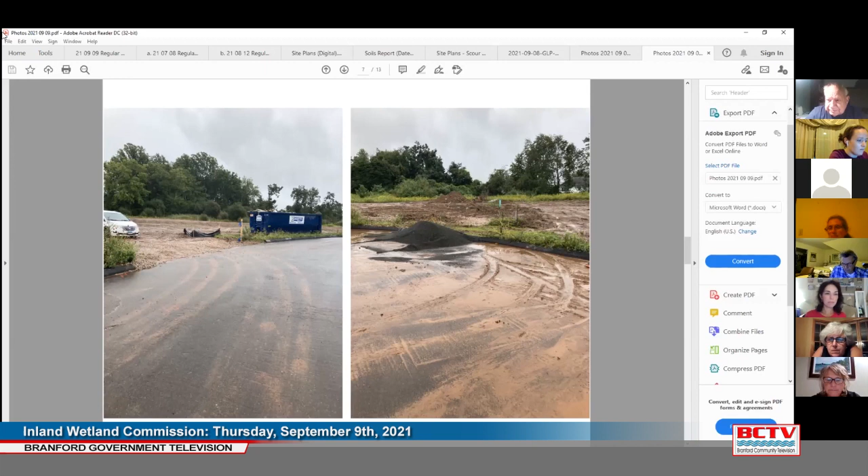This is Commissioner Wasserman. I believe, Commissioner Grenache, that Commissioner Boda talked about the material tracking, et cetera, as part of her amendment. And she wants to know if you would accept that amendment as part of your motion. Yes, I will. Commissioner Kraus, do you accept that as a second? Yes, I will. Any further discussion on this item? All in favor? Aye. Aye. Aye. Any opposed? Any abstentions? Okay.

We have an enforcement activity. Notice of violation for Island View Village condominiums. Drainage maintenance required. Initial correspondence was sent on September 1. Staff, have we heard from the applicant? Jamie Frederick, the Wetland agent. We've heard from the property owners. Property owners, and future applicants.

So the condo property has two different associations. There's like a phase 1 and a phase 2. I've heard from both. They both intend to comply with the notice of violation and assess the drainage issue. I believe that we have someone present from both, and I believe that one party has brought their project engineer as well to the meeting. If you want me to recap what the situation is, I can, or I can hand it over to the property owners to discuss their reaction to the notice of violation.

I think from the commission standpoint, the guidance to give the property owner would be what exactly it is that you're looking for. Are you just looking for a plan to repair what has happened? Are you looking for any sort of restoration of the immediate area or anything like that? I think those would be the appropriate things to discuss this evening. Jamie, this is Commissioner Boda. Would you just recap briefly what

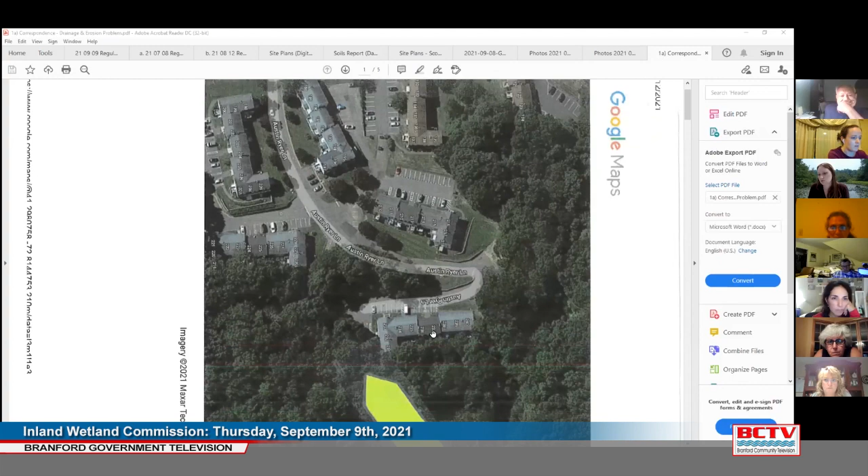Commissioner Wasserman, what did the NOV specifically suggest? Sorry.

So submit an inland wetlands and watercourses permit application for review to repair the drainage system outlet and stop further siltation of the watercourse/wetland. The application should include an engineered plan to repair the drainage system and stabilize the disturbed area. The plan shall include erosion control measures and a stormwater management maintenance plan.

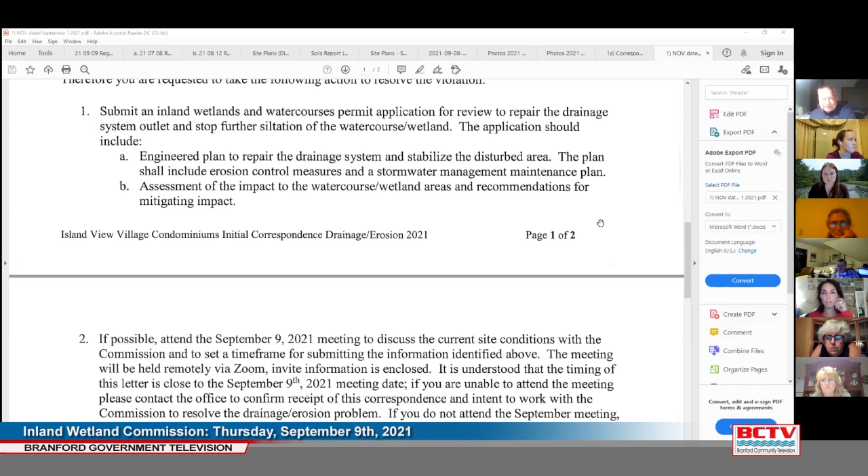If somebody from Island View Village Condominiums wants to give us their thoughts, that would be helpful. Please. Cheryl. Thank you. Cheryl Danu from Merritt Properties, the property manager for Island View Village 2. We are planning on meeting with Jamie tomorrow with the property manager from Island View Village 1. And we also have in tonight's meeting Chuck Eaton, who is our engineer who we have contracted with. So I don't know whether Chuck wants to just speak on behalf of the condition that he had originally seen.

It seems like this area is a combination of the two properties, the two water sources from the runoff has compromised this existing pipe. So it's not just this pipe that is having an issue. It seems like water is coming from the adjacent property. So until we really can take a look at it tomorrow and investigate exactly where the water is coming from, it's going to have to be a combination of the two properties, maybe doing some mitigation on where this water is coming from and how it's going to be handled in the future. So I don't think it's going to be something that we can fix immediately without some significant planning.

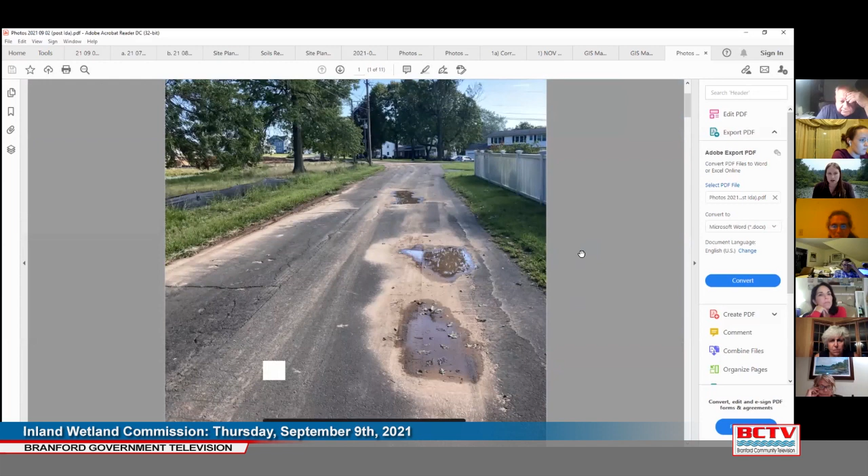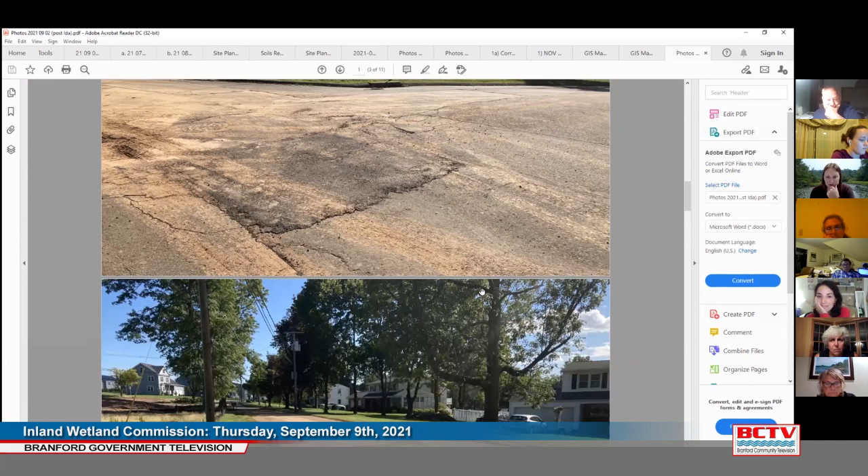So for those of you that went to the site walk yesterday, this is Cherry Hill Road, which you drove down to access the first site. So there was some sediment that had gotten into the roadway. There were some hay bales going across a driveway that had gotten blown out because they were not staked, which was a major part of the problem. Also, there was a rain garden area that's not been seeded yet that overtopped the silt fence adjacent to it, which was uphill of that. So I think that also lent to the problem.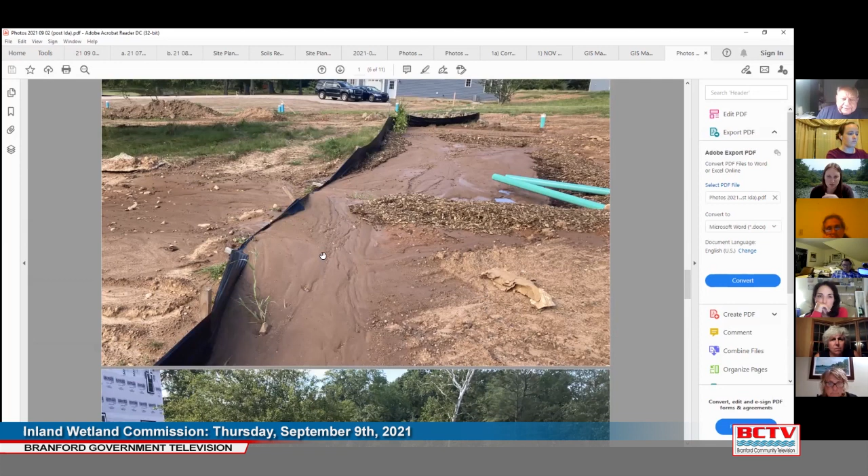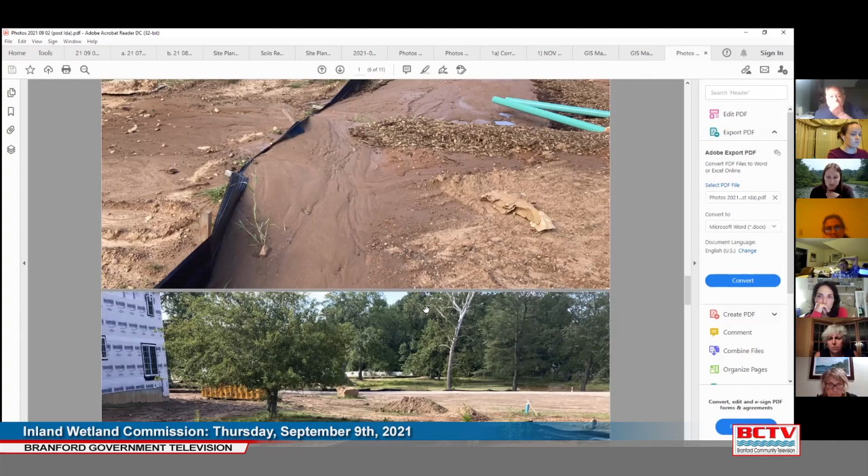And so I told the owner I was going to bring it to the commission's attention because obviously the conditions are not good. This is an interior silt fence and there's another one below it. However, this is where I was talking about with the rain garden overtopped, and there are two driveway accesses down gradient of where this activity is. And we didn't make it out there until the end of the day afterwards. I personally didn't see it. I sent Abby out. So I'm not really sure if this was part of what got in the street or not.

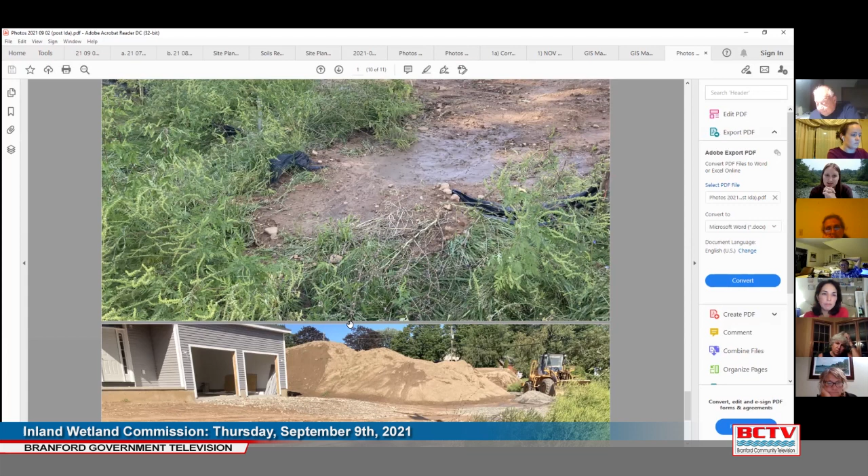Commissioner Basserman. Okay, we certainly see that there's some issues here. Would our normal course of action have been to issue an NOV? Yeah, so I was hesitant to issue the notice of violation in part because it was such a large storm. However, these sites aren't exactly new to having issues, and I wanted to stress that this can't keep happening. And particularly this was a problem prior to the storm, but I had asked them to repair it and obviously it hadn't been repaired.

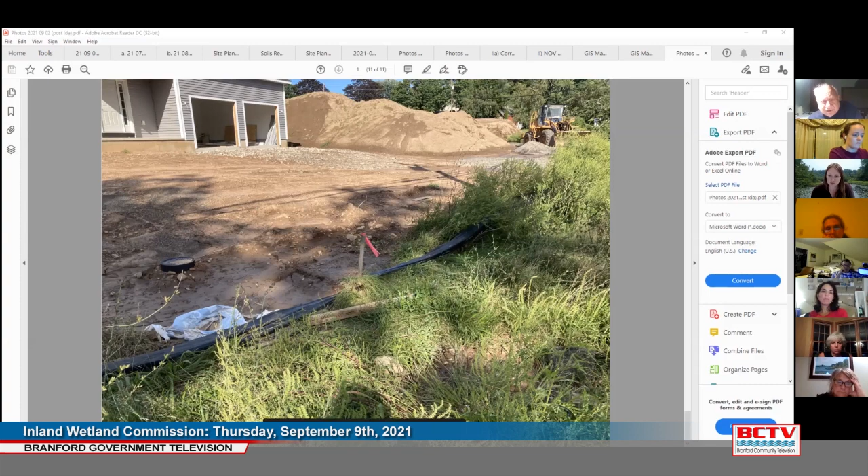And so since this inspection, they have done some work. However, you probably noticed there was still some sediment in the street. They had swept, but I think scraping is needed. Commissioner Basserman, is there one responsible party for the sum total of what we saw here or not? Jamie Frederick, the Wetland Agent. So yeah, I would say there's one party that's primarily responsible. Some of the lots have sold, but the issues are relative to the lots that are being developed.

So also, not going out when it's raining, it's hard to tell if the water courses are being impacted because they're fast moving. However, it looks like some sediment may have gotten into this water course in particular. Can't swear that it came from the development on hand, but it seems plausible. So just making sure that these things are not happening moving forward, I think, is my primary concern.

And then also maybe getting some guidance on when I should possibly consider issuing a notice of violation or cease and correct order in these instances, because obviously there's a couple of sites around town, and the three that I put on the agenda this week aren't the only ones, but they were the ones that got hit the hardest with this particular storm.

It would seem to me that our practice in the past, correct me if I'm wrong, Commissioner Vasserman, is to issue the NOV and hopefully get cooperation. Sometimes when that NOV doesn't seem to be the appropriate vehicle, we have to move to cease and correct. But obviously nothing's going to happen unless there is some correspondence. And as I say, typically we use the NOV to make sure that they understand where we're coming from, as you did with the prior discussion that we had. There was a NOV and it listed what needed to be done. It seems to me that the jump to a cease and correct without the NOV might be a bridge too far.

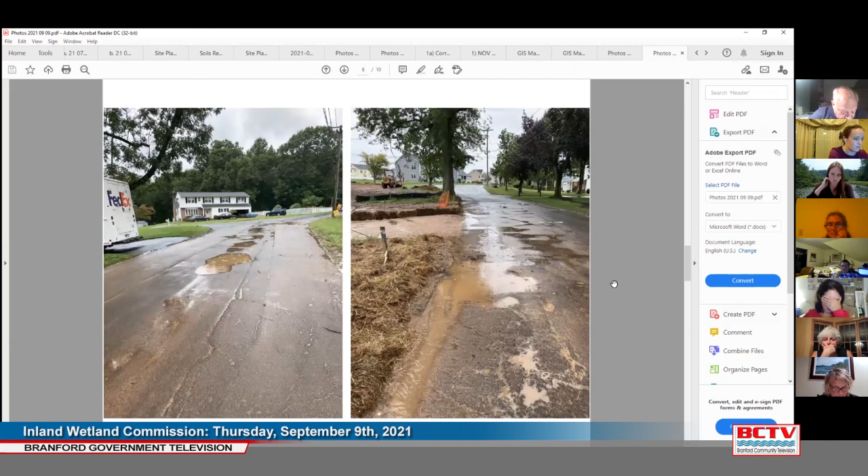This is Commissioner Boda. I agree. I mean, I do recall one cease and correct for kind of egregious flouting of the expectations of correcting sediment and erosion control that had been noticed on reports, and that they kept kind of coming up and they weren't fixed. And so it went, I can't remember if there was an NOV first or it just went to cease and correct because it had been discussed through the course of looking at engineering reports.

So I think best practice would be the notice of violation as early as possible, especially if it had come up by looking at the engineering reports and they're non-responsive, that those same issues are repeated, then the NOV should go out. And by the time it comes to the commission, if there's really been a week, 2 weeks, and there's been no movement, because it's in their plans that they have to respond, I think, within 24 hours, then we can go ahead and do the cease and correct. It's a long time between now and the next meeting for them not to respond to an NOV. Anybody else?

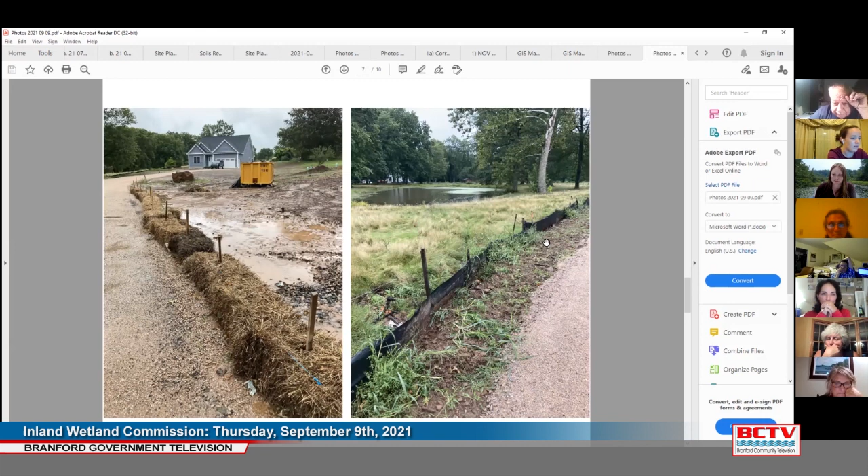I'm Commissioner Papantonis. I'm a little concerned because we've had so much rain today too, that this is what it's going to look like tomorrow over there. Jamie Frederick, the wetland agent. These pictures you're looking at right now were taken this afternoon. So luckily today's rain has been somewhat slow, relatively speaking. And they have made some of the repairs that I requested. But obviously with the site conditions and when I last talked with them, they wouldn't have been able to get them all done. Yeah, Commissioner Bass, the other thing is this is not just one site. There's multiple locations here. Yep. So there's a fair amount of work that needs to get done quickly.

So at this point, work with the developer, get things fixed. As long as it happens in a timely manner and they stay on top of things, continue. And then if there's another problem, issue a notice of violation. I would say, Commissioner Boda, I think you need to issue the notice of violation now. Agreed. Okay, for this site that we're specifically looking at now. Yep. Especially if hay bales weren't staked and they weren't following their sediment and erosion control plan, and it's already been discussed, then they should definitely have the notice of violation. And I would include that our next action is to apply a cease and correct to the construction site.

Jamie Frederick, the wetland agent, just to be clear, the hay bales were installed as an added precaution. They were not on the site plan. And I advised him in the future, if he feels the need to put them there because of the storm, to make sure they're staked. So that was not something that he was supposed to have done, but it's something that definitely would have helped.

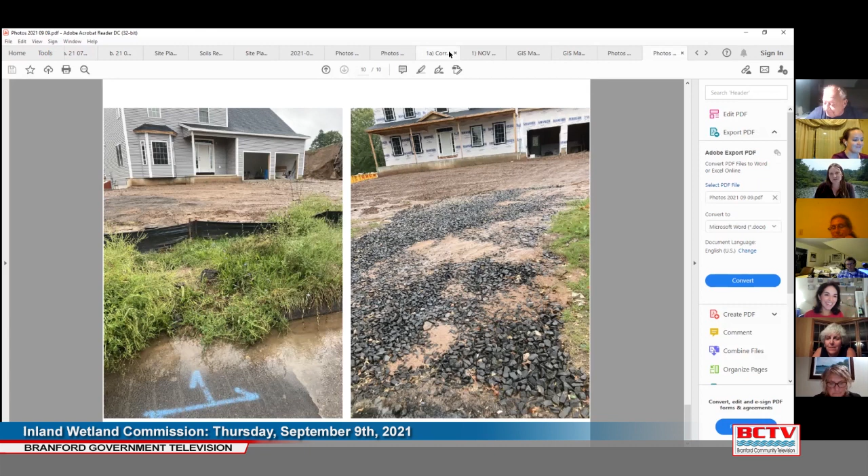Okay. Inland Wetland 191004, 339, 333 West Main Street, stone parking area for car dealership, erosion control, deja vu, follow-up from Tropical Storm Ida. Jamie Frederick, the Wetland Agent. I will pull up the pictures from our first inspection post Ida. Is my screen sharing? No. All right. So this is Pent Road. The property address is West Main Street, which is what you're looking at the top of the screen. Oops, sorry.

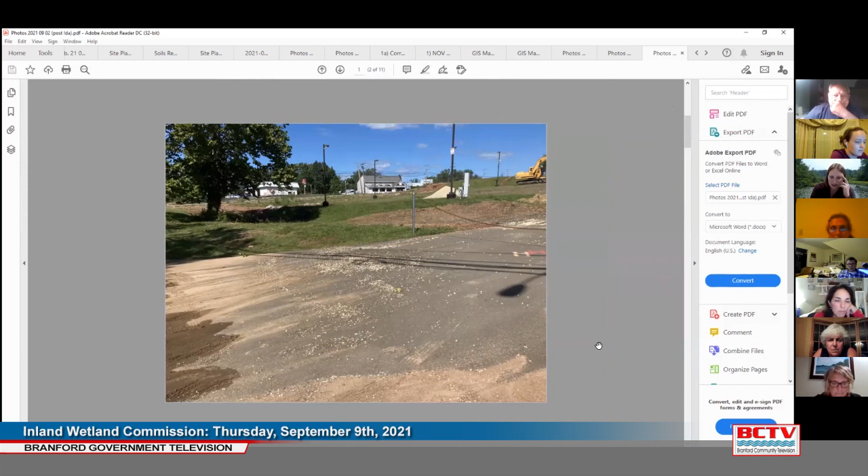This is slightly smaller. So as you can see, they had some sediment get into the driveway area and into the road. Under this tree, there is a catch basin that discharges somewhere onto the site in the background. I don't know where the discharge of the system is. And on the far side of the site, there's a wetland. So I don't know where the discharge is relative to the wetland area, but it's certainly concerning that material is getting into that system. So I believe this is the second time that this has happened.

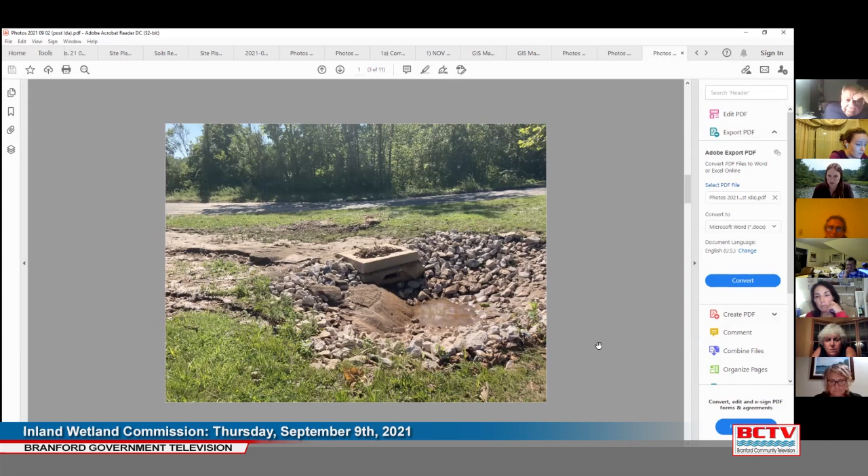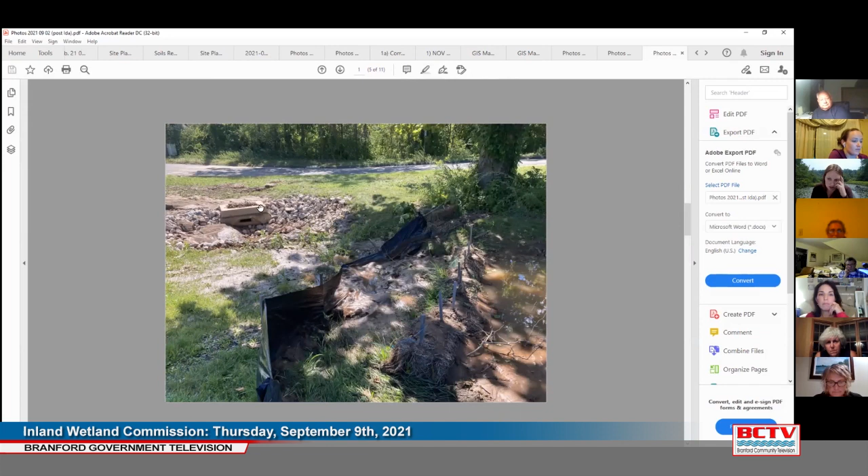There were some measures put in place after the first time, which was Henri, to try and mitigate the activity. And there's another catch basin and drainage area that was installed in response to the first time, to try and help mitigate it happening again. And they ended up with problems out there again because the whole site right now is pretty open and disturbed. So after the first time, they did clean out the basin area and the catch basin. And they have stated that they'll do it again, and that they plan on topsoil and seeding within the next, I believe, 2 weeks it was.

Let me pull up that email real quick. Erosion and sediment issues that stem from the extreme rainfall event related to the remnants of Hurricane Ida have been generally cleaned up. Silt fence damaged during the storm has been reset, and in some instances backed with hay bales. The silt in the detention basin has been cleaned out. Erosion in swale has been repaired, and swale has been enhanced by installing riprap along bottom, including riprap check dams, to further slow future rain events. Erosion control blankets will be added to the sides of the swale where the flow was more concentrated. The schedule is to get topsoil finished and get the site hydroseeded within the next 2 weeks.

And so the current conditions do reflect that the actions outlined in that email have occurred for the most part. So what you're looking at in the right-hand picture is that additional basin area that I was talking about. So that's freshly dug, which is why it is in that condition. And this is the existing catch basin in the swale area where the silt fence has been repaired, and they've installed hay bales again and additional stone up the swale area.

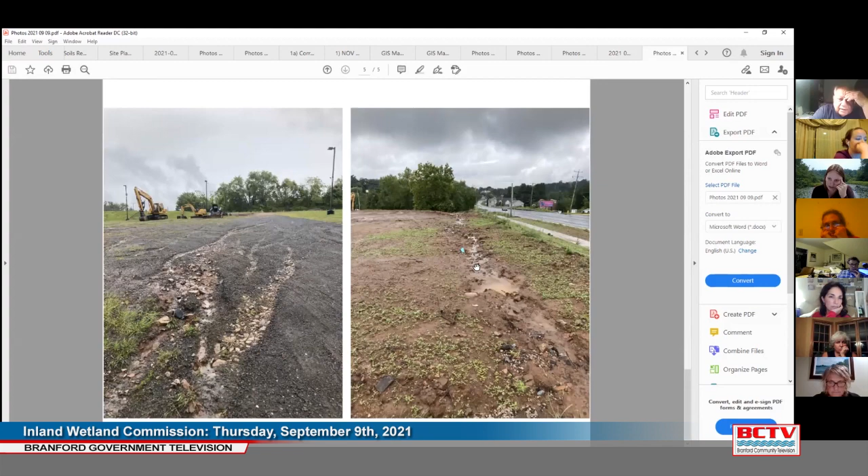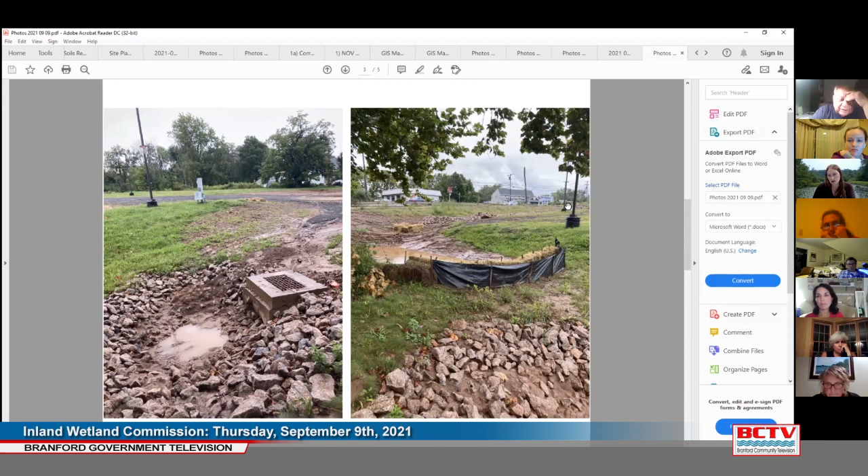So this is above the top of the swale. You can see it in the background of the picture. And apparently I did not throw up a really good picture of the actual stone in the swale, but that area has been basically fully lined with stone at this point. But so for this site, my biggest thing is they're pretty much done. They just need to get it seeded and stabilized, so it's not a problem.

And I don't see any reason why they can't do that in the time frame they've outlined. I have drafted an email, but I have not sent it yet, requesting that they add erosion controls along the driveway, as you can see in the left-hand picture, where there's been some sediment coming into that drainage area until it's stabilized. So I plan on sending them that update as well.

This is Commissioner Bassman. It looks like there's a game plan. Looks like they're moving forward relatively quickly to resolve the issue. I mean, am I articulating correctly? The NOV might be a little overkill here.

This is Commissioner Boda. I agree. I mean, I think if they've been responsive and they're doing the things that we would have enumerated anyway, and there is a last step, I think that if they don't do that within the next couple of weeks, you could issue it ahead of the meeting. But if they continue to progress, checking off their check boxes, then I think we're okay.

You okay with that, Jamie, I assume? Yeah. Okay. Any commissioner feel differently? Moving on. Jamie Frederick, the Wetland agent. I don't know if it's fair because the applicant or the property owner was present before and they're not now. So I won't ask for that clarification right now. That item has already been handled tonight.